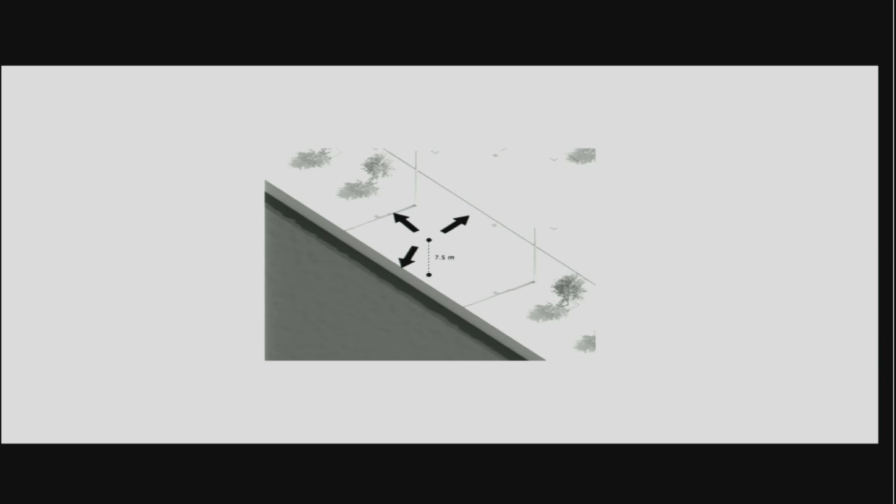We got invited to do a so-called viewing tower in Aarhus, the second city of Denmark. It was going to be 25 feet tall, which is hardly a tower. They wanted people to enjoy the view of the port, which is the biggest development area in the city right now. They wanted it ADA accessible, so we had to install an elevator—half the budget went to that elevator. We thought it was kind of an undramatic way to take an elevator 25 feet up, look out, and take the elevator back down.

So we thought maybe we could solve the ADA access in another way. To get 25 feet up, you need 500 feet of ramp. So we thought we could make this weird promenade in the sky, almost like a flower, where the journey is actually the destination. Since we're in the port, we thought we could make it out of raw steel, like a hybrid between a sculpture and shipbuilding. We got a shipbuilder to actually make our models—it was by far the coolest model we ever built, and the heaviest.

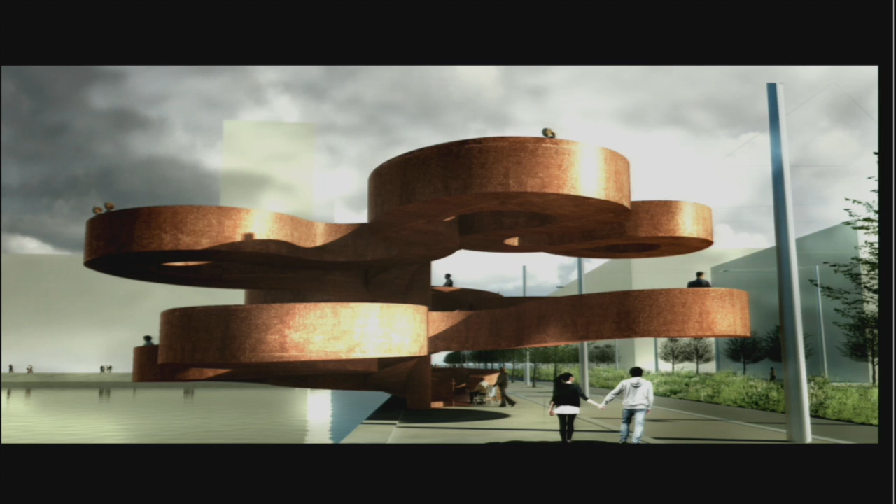Basically, it would sit on the edge of the pier, and you'd get this amazing meandering path. Actually, the handrail is also the load-bearing structure, so everything is a single monolithic steel structure, sort of tipping on the edge of the pier. We didn't win. But the idea was that by identifying this issue about ADA access and reallocating resources from a boring elevator to an exciting journey, that was somehow what created the project.

Another example is the project we have right now at the National Building Museum. We got asked to do a summer installation, and it was suggested to do a maze. It was going to be placed inside this amazing room inside the National Building Museum—it's the scale of an urban space, but under a roof. We thought, since there's so much height, the typical maze is purely two-dimensional, like this very flat experience.

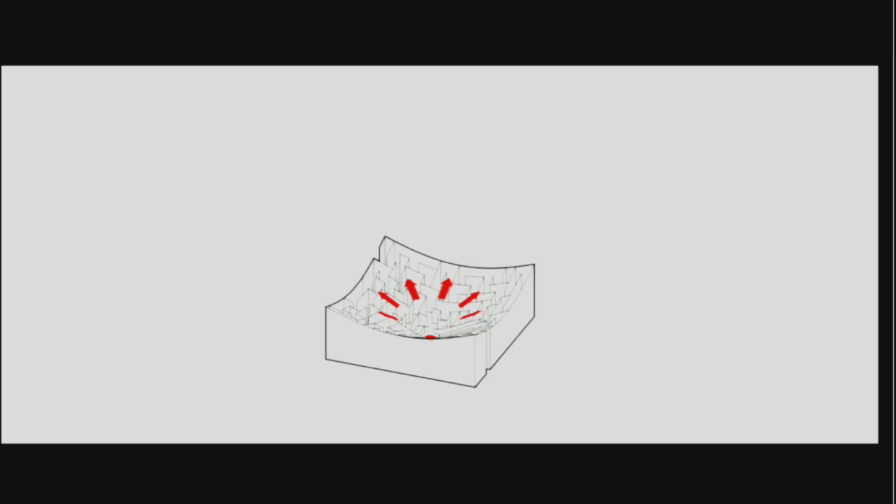We thought we should really explore the third dimension, and came up with this idea that if we extract a cone from this vertical volume, we create a situation where when you finally go through the entire maze and reach the center, you're actually rewarded with the knowledge that you know exactly how you got there. From the center, you can overview the entire maze.

As you go through it, in some cases it's incredibly narrow, like a vertical canyon, and as you journey through it, the spaces really transform. Finally, once you reach the center, you start getting a sense of everywhere you've gone through. It's designed so that when you reach the center, you've traveled through 95% of the maze, and there's almost a straight route taking you out. So again, this attempt to introduce the third dimension to an otherwise two-dimensional experience.

Maybe as a last example, this is my old high school. We're currently building this part—some classrooms, dressing rooms, and a football field. But the first phase was we were asked to do a sports hall. The only place to put it was either on the football field—but that's sort of the national sport of Europe, so to ruin the football field would be a pretty lame decision.

So we thought, let's put it in the courtyard. We would have to dig it down. Handball halls—handball is a Danish sport, invented by a Danish officer—but it's 15 feet of height you need on the perimeter, and then you need 30 feet in the middle.

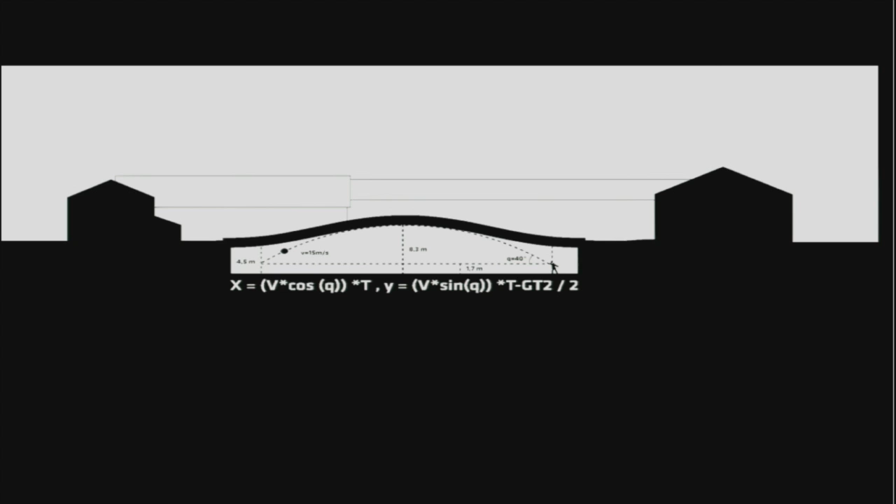Since we got the commission from my old math teacher, we thought we'd base the design on the mathematical formula for a ballistic arch. So it's essentially the geometry of a thrown handball that has shaped the curvature of the glulam beams. In the courtyard, it creates this sort of molehill.

Of course, we were afraid of occupying the courtyard, so we placed this furniture sort of inviting people to invade. There's a small auditorium over here—the entire edge is the height of a bench. Actually, this soft, friendly molehill has significantly increased the use of the courtyard.

So this is the construction site of phase 2. Also, we had the chance, the canteen is in the basement. So we created this new entrance that gave the high school a new front door. You enter into the canteen, then you continue down into the sports hall. One aspect: you have daylight washing the walls, so the perimeter is always sort of glowing.

And there are no finishes. Essentially, everything you see is hard-working material. So you have the glulam beams, that is the structure in the ceiling. You have the sports floor. The concrete of the retaining walls is the actual retaining walls. So there was no secondary application of finishes. And then the furniture incorporates all the lighting.

So you have this slightly magical atmosphere in the evening.

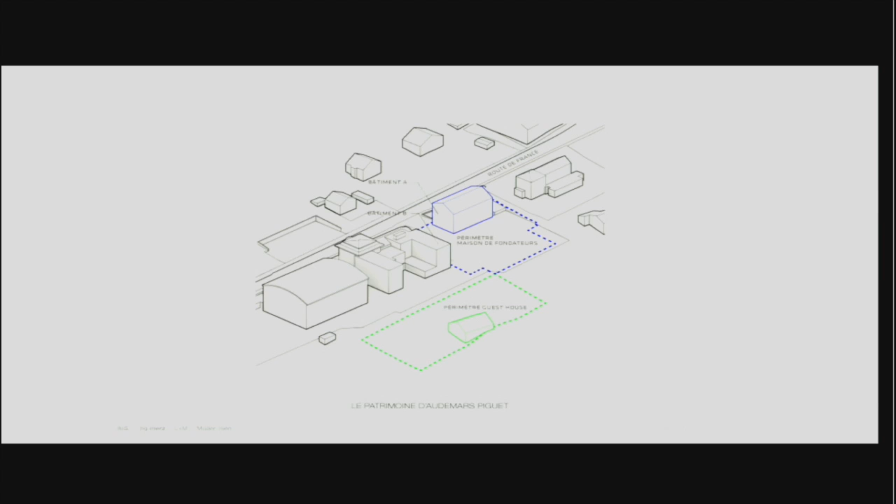And we were sort of invited to imagine how to introduce a museum of the history of watchmaking and of the company in this beautiful pastoral Swiss landscape. So we started, first our thinking was, you have the existing headquarters and the historical factory that used to make the watches up in this attic.

So we started trying to fit in by simply connecting the existing buildings. But somehow it always became this weird wall against the street. So we thought we should probably stay behind and focus on something lower that could coexist with the existing buildings. We tried breaking the museum down into its different parts as little pavilions, almost like a village behind the existing building.

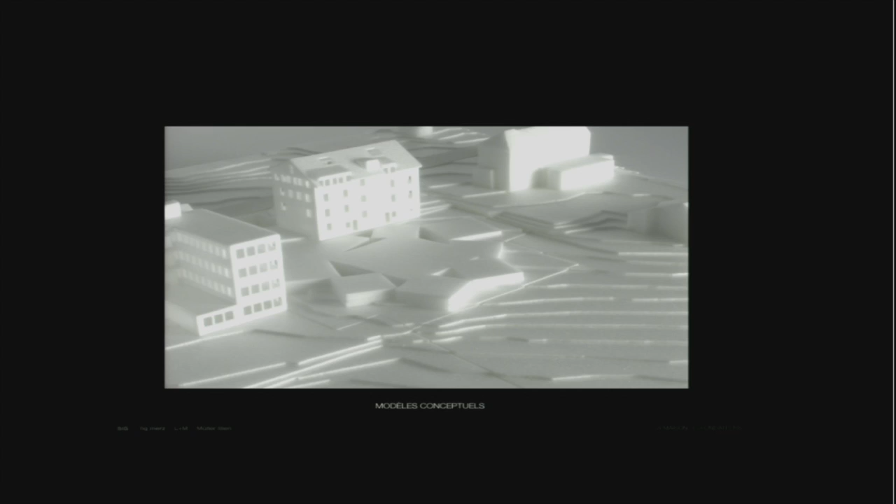We tried to organize it as a route. Basically, it's a linear exhibition where you go through the different exhibitions and then you end up visiting the attic. So we played with various ideas, then we tried to really stay low, to keep it sort of within the landscape. And we had to basically kiss a lot of frogs before we found something that was remotely promising.

So basically what we ended up with was this idea of taking the linear sequence of exhibitions, turning it into a single trajectory, and then to fit it into the site, we coil it up in this double spiral that spirals in and out. That basically becomes the exhibition.

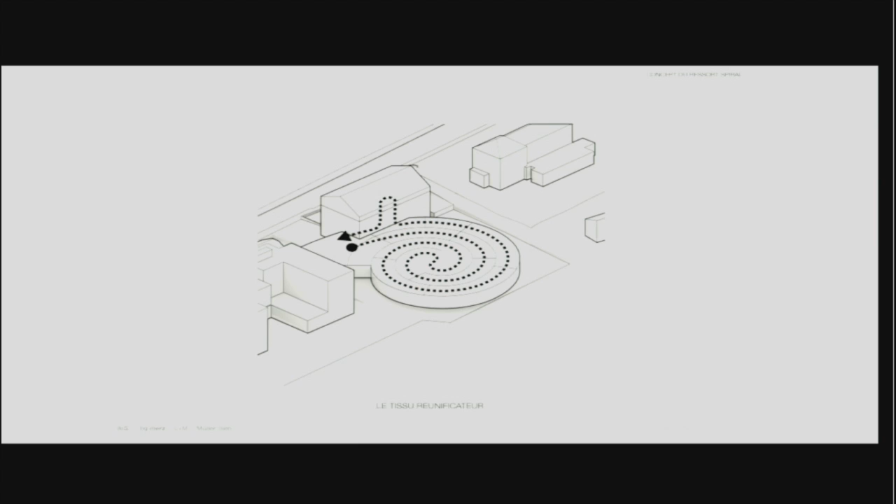So you go through into the central space, and then from here you move back out up to the attic, and then you're done. So basically we follow the topography of the landscape, and then by inclining the roof in different directions, we can bring daylight and views deep into the exhibition space. So even though it's a deep floor plate, you have a lot of relationships with the surrounding valley. From the roof, it's almost just like an incision in the landscape.

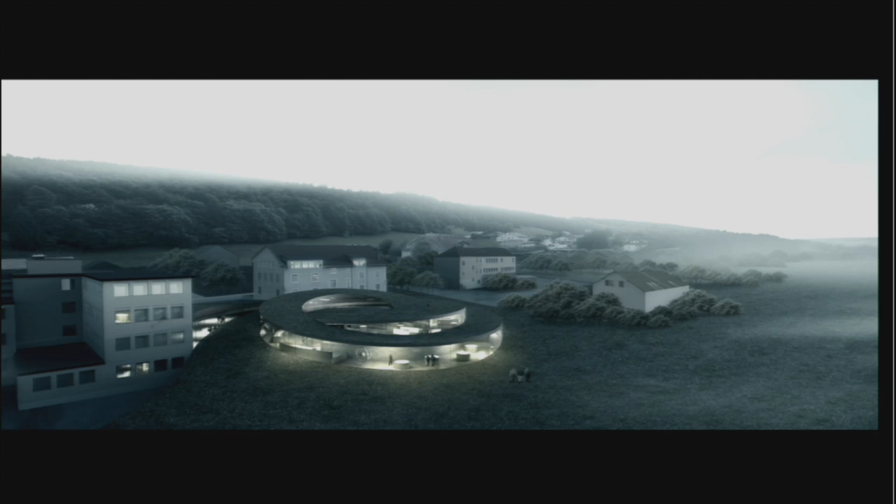So basically you enter into the existing headquarters, and even though it's like this linear sequence, the ceiling heights and the amount of daylight changes from very controlled to completely open. So it becomes this rather varied journey until you finally take the stair up to the historical attic.

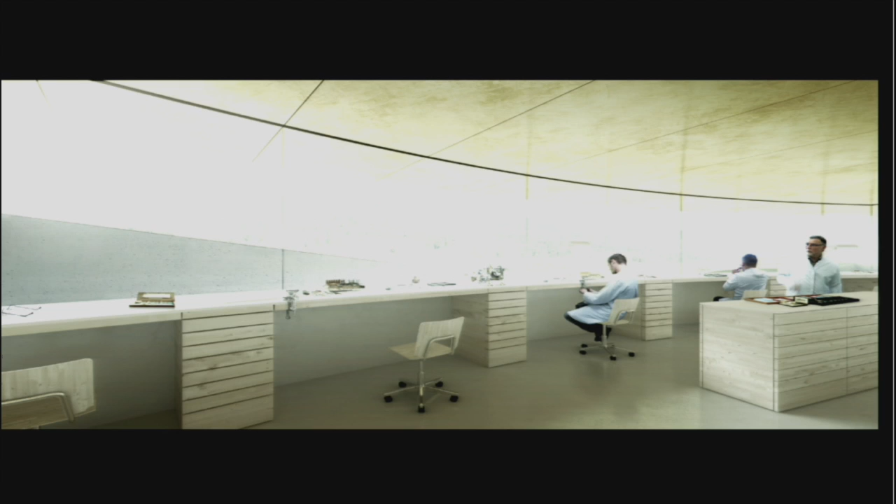The first thing, as you come through the existing building, you have a beautiful view over the valley. Then you get through some more controlled spaces, and you even pass along the workshops where the master watchmakers sit and repair the clockworks. Then as you move towards the center, you have a rather large central exhibition space.

And if you notice, throughout these cracks you get daylight and views of the surrounding valley. But to not interrupt, and in a way to almost quote the art of watchmaking, there are no columns. It's a very thin steel roof, clad in brass.

It's the glass itself that is actually carrying the roof, basically because glass is stronger than steel when it's in compression, but it cannot do any tension, and it also handles seismic events very badly, and the Jura Mountains is a seismic zone.

So when there's an earthquake, it trembles and breaks. But because everything is curved, the rigidity of the geometry of the curvature makes the glass strong enough to carry the roof, and it also means you have this completely blatant relationship with the surrounding landscape. Again, this idea of trying to squeeze as much performance as possible out of as little material as possible.

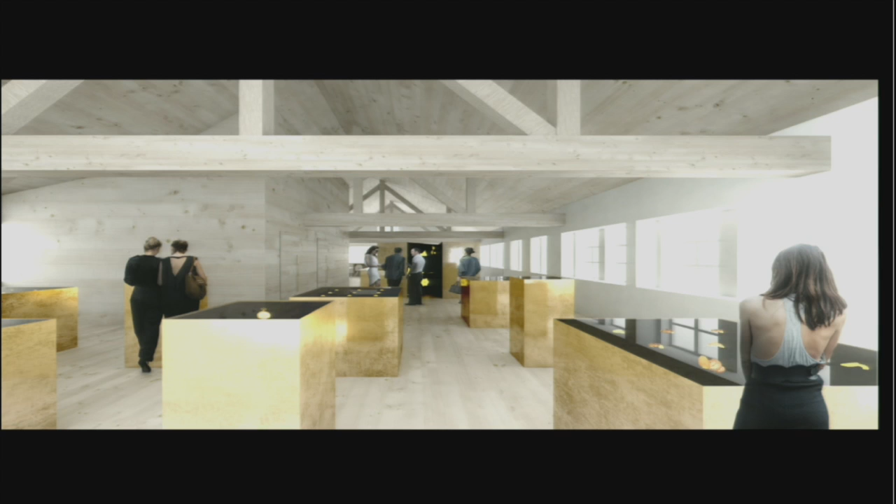And then for the existing building, we refurbished it. This is the stair that takes you to the attic, and here we stick to the local traditional materials.

So basically, we got the job. I won a nice watch. It's the favorite watch of JC, just to let you know.

Essentially, even though when you explain the project it feels almost natural, like it could only be like this, and once we arrive we feel it couldn't be any other way, in order to get here we had to go through an onslaught of different attempts. A lot of them were really rather bad, but even though individually they didn't succeed, they were important steps in identifying which way to go.

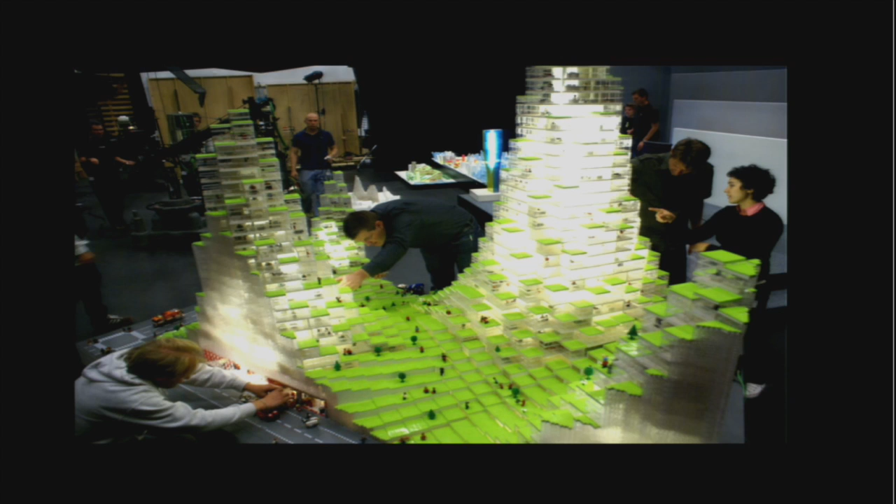So of course, model making and testing is a big part of the office. We love to make models, huge models, and sometimes we make models out of Lego. This was a project we called the Lego Towers, because it has this modularity that characterizes Lego. We actually got Lego to sponsor 250,000 Lego bricks, 2,000 Lego people, and 500 trees to make this huge model. When we were done building it, there was Lego left over the entire office.

This is just one of my colleagues walking around the office with a camera recently. There's basically Lego everywhere. Even the signage is made out of Lego.

This is one of my colleagues, Gabriel and Frederick, doing a workshop with the citizens of Copenhagen on how to influence your own environment using Lego. And Lego even copied one of our designs: this is the Copenhagen Harbor Bath, Lego style, in the flagship Lego store in Copenhagen.

So you can imagine when Lego approached us and wanted us to compete for making this new Lego House in the hometown of Lego. It's basically a house dedicated to all aspects of Lego culture, in a way looking at the world through the eyes of Lego.

We went completely bananas. I made a small speech for the team when we kicked it off, and I said, if BIG had been founded with the purpose of building a single building, it would have to be the Lego house. So we desperately wanted to get this job.

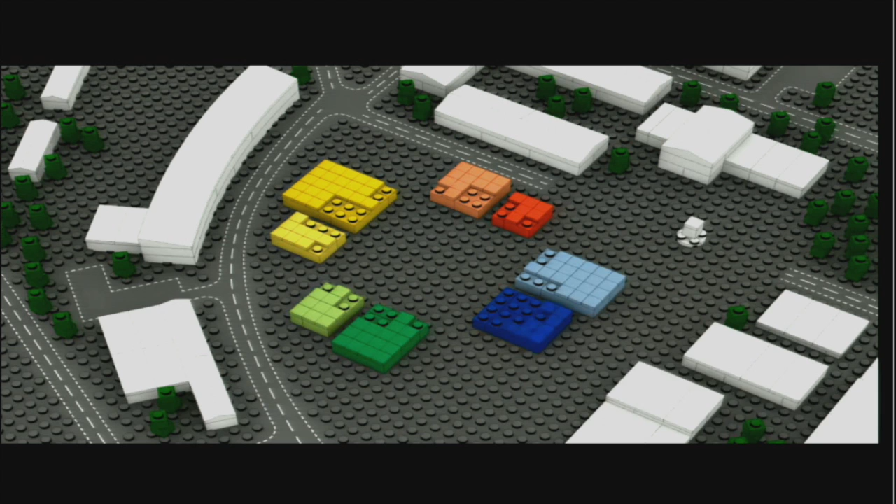So basically, it's in the middle of the town square of Billund, where the city hall used to be, and it was important that it shouldn't feel like a Lego invasion of the city. So we decided to create this village where we took all of the programs that would have a more urban character and organized them around a central square, what we call the Lego Square, that is completely public. Then it becomes like this covered cave, because above are the exhibitions, and finally the Keystone Gallery that sort of finishes it off, creating this accessible roofscape of interconnected playgrounds.

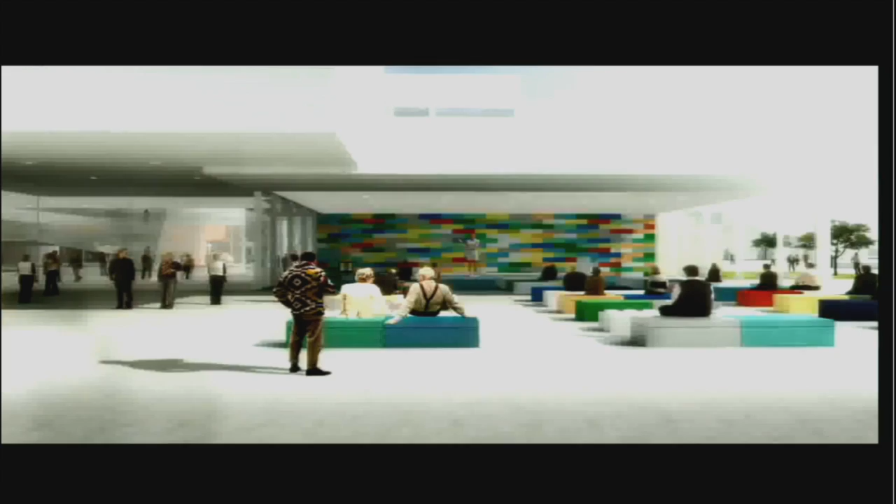So even if you are not going to visit the Lego house, if you're a citizen of Billund, this is actually sort of part of your urban environment. You can enter the covered square. There's an auditorium that can open up towards the outside.

And then basically at the heart of the square, this is imagined to be almost like a living room, an indoor urban space for the locals. Then you have this staircase surrounding some epic Lego installation. You have the Keystone Gallery in the middle, where it's almost like a classic art gallery, and then you have this series of overlapping spaces with all the exhibitions.

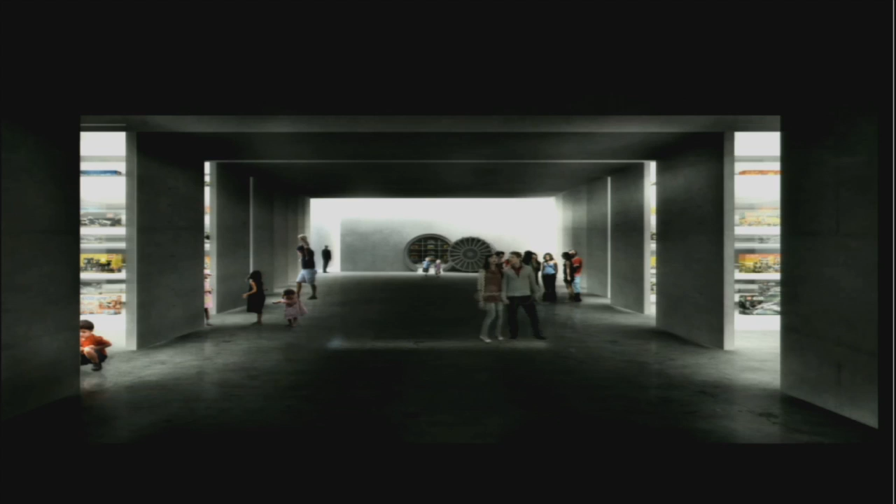And then finally, you can descend into the holiest of the holy in Lego, which is something called the vault. Every AFOL, which is adult fan of Lego, knows that the vault is where they keep the first of every single Lego box that has ever been produced. So it's a space that's designed to be able to withstand nuclear holocaust.

This is the Yellow Castle from 1978. It was the first Lego set that I got, which was the first year they introduced the minifigures, and it's apparently one of the gems of the Lego collector. We found we had to pay 2,000.

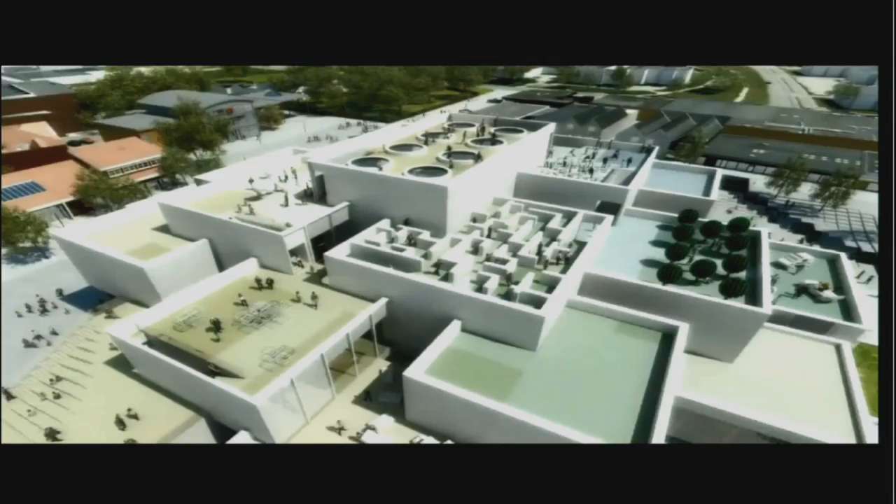Two of my colleagues, who are actually former GSD students, Kat Huang and Brian Yang, got married. So we made a fake wedding in the office for everybody who couldn't go to the wedding in Texas, and we gave them the Lego castle. I think it retails for around $2,000 on eBay, so if you have one, it's worth its weight in gold.

And finally, the entire roof is this interconnected series of playgrounds that are also publicly accessible for the people in Billund.

So yeah, we just broke ground. The family laid the foundation stones, concrete Lego bricks, that the entire museum rests on, and this is me together with all the richest people in Denmark.

And if you're interested, if you can't wait, you can actually buy the Lego house in a Lego architecture set, including a minifig that is built exactly like me.

So basically, I think one of the things that I really like about Lego is that it has this capacity for empowerment. It's not just offering children or anyone playing with Lego a pre-digested experience, but it actually empowers them to create their own world and inhabit it through play. And also, when you look at Minecraft, the success of Minecraft, which is essentially digital Lego, it's again that instead of giving this premeditated experience, it gives children the capacity to create their own environment and then inhabit it.

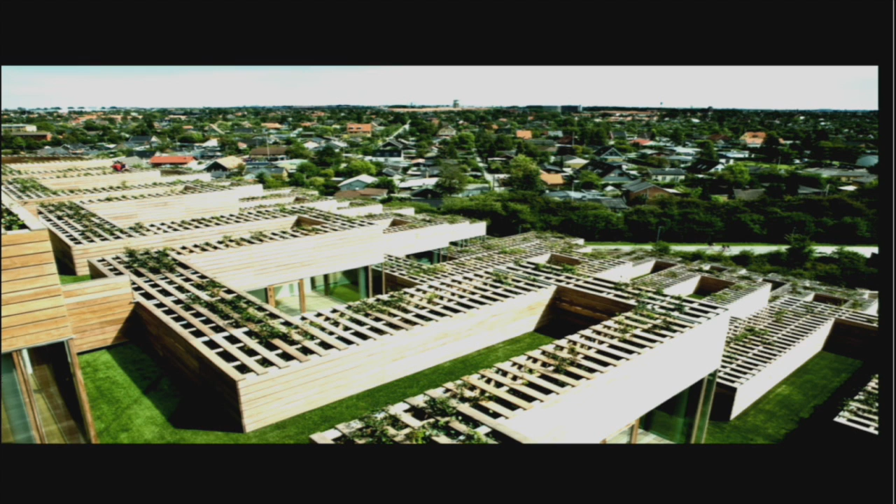Just some examples, like of course architecture is much slower than Lego, so even though we have quite a few projects on the way, a lot of the work that is built has been conceived almost 10 years ago. One example is we did this project in Copenhagen called The Mountain that transformed a traditional apartment building into a man-made mountain of houses with gardens. You have a suburban lifestyle, your kids can run out and play, but it's in the middle of the city. And this is made possible by putting it on a parking structure.

There's a Swiss elevator, a funicular elevator that gives you access to all the apartments. The parking is naturally ventilated and naturally illuminated. The holes that provide the natural ventilation also create a giant urban artwork for free.

Taking some of the same ideas one step further at the outskirts of Copenhagen, basically where cattle takes over, we created something called the 8 House that combines shops and offices on the ground with townhouses that are lifted by the offices up into the sunlight and the views, also creating this mountain path that expands the public realm.

Instead of being restricted to only meeting your neighbors on the ground, you can actually walk or bicycle all the way to the penthouse. So it's not just a facade design or a sculptural form, it's actually a three-dimensional urban condition where you really see social life occurring throughout the vertical dimension as well.

The amenities are all connected where the 8 crosses itself. There's this ricocheting stair that connects the ground to the roof terrace. And also, all of Copenhagen is as flat as what you can see here. So suddenly this has become a destination where people go to promenade to enjoy the view of their city.

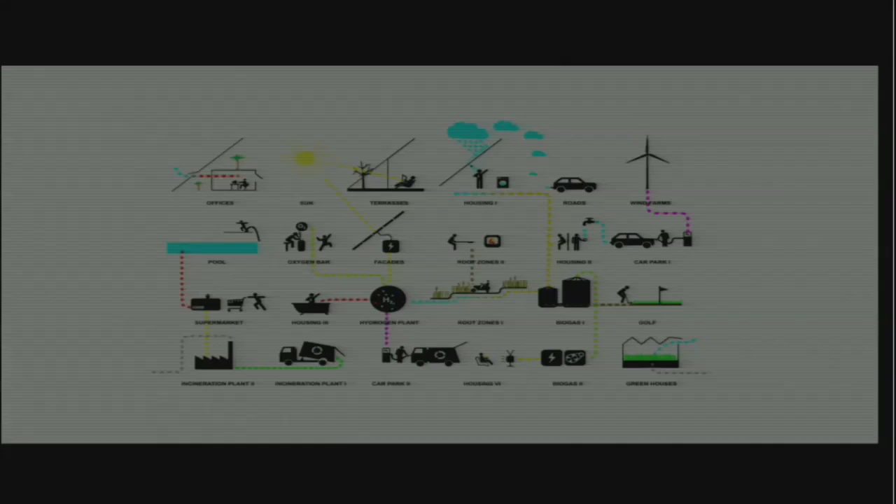I think these are some humble examples of where we try to make the city we live in a little bit more like we would want it to be, like with mountains and sort of Mediterranean mountain towns. Another aspect is this idea of not seeing the city just as an accumulation of architecture, but really seeing it as a man-made ecosystem.

We've been working a lot on trying to reimagine sustainability, because sustainability has of course become this big buzzword, but it's always been associated with this idea of needing to somehow, this sort of Protestant idea that it has to hurt to do good.

So when we got invited to do the Danish Pavilion at the Shanghai World Expo, where the subject was sustainable cities, we thought, what if we could turn it the other way around and focus on all the aspects where sustainability actually makes life more enjoyable.

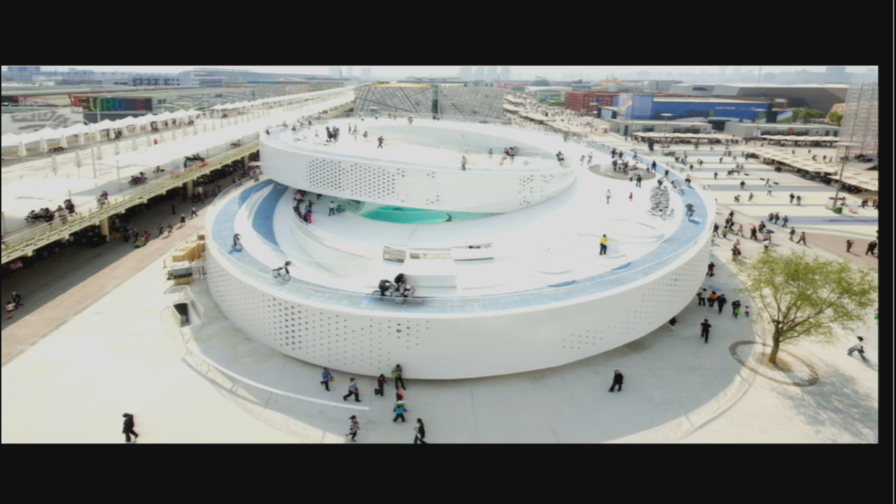So we took the aspects of Copenhagen that make it both sustainable and enjoyable, and condensed it into this loop streetscape, complete with the blue bicycle lanes of Copenhagen and the Copenhagen city bikes. For 20 years, we've had this system of free bicycles.

Allowing people to experience the joy of riding a bike through the city instead of being stuck in a traffic jam. You could also ride through the exhibition, making it the perfect museum for impatient people, because you could do everything in three minutes.

It had all of these sort of informal elements, like benches, and actually our first project from 2002 was the Copenhagen Harbor Bath, that extends public life into the water, because our port has become so clean you can swim in it.

You don't have to drive for hours to get to Cape Cod. You can actually jump in the port in the middle of the city. So we recreated this experience, allowing the Chinese to experience how clean, if not how cold, Danish harbor water is.

Finally, we thought we need to get the Chinese to come and experience this. I mean, it's fine if it's there, if they don't actually go there. So we started looking for common denominators between Denmark and China, and found that in the Chinese public school curriculum, they have three fairy tales by Hans Christian Andersen.

One of them being the story of the mermaid. So we proposed to move the mermaid to China. When the Danish People's Party, the Danish equivalent of the Tea Party, heard about it, they tried to pass a law specifically against moving the mermaid. So I had to go to Parliament and argue her case, and finally we got her.

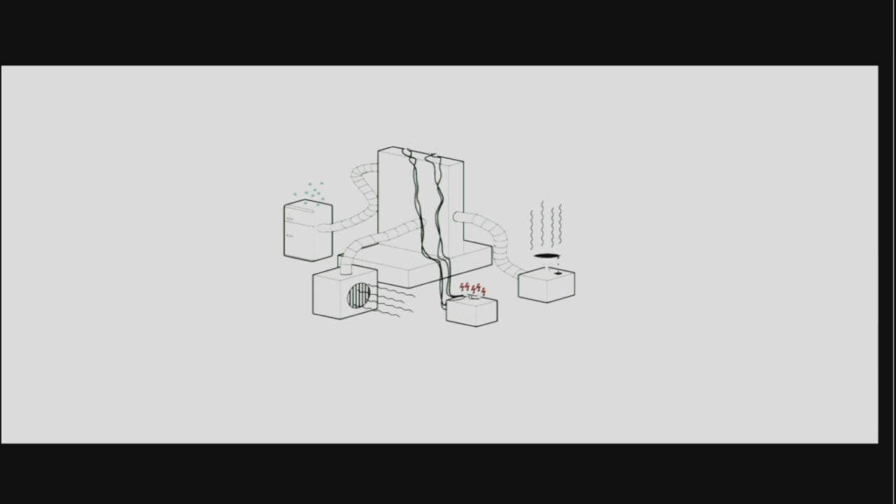But then it has a machine room full of gas-guzzling machinery that tube feeds it. And as a result, buildings started looking exactly the same, regardless of what culture or climate they were part of. And his suggestion was, if you look at pre-modern architecture, you had this vernacular architecture where the local population had found ways of using the local materials in response to the local climate, creating radically different vocabularies that are not aesthetic or academic, they're empirical.

So you know, like the dome shape of the igloo that combines a minimum surface with a maximum contained volume, like these sunken courtyards in the windy steppes of Mongolia. You have the white villages of Greece, where the white reflects the heat, and you have the flat roofs where you can go up and enjoy the evening breeze.

So what we're suggesting is not a return to nostalgia, but what you could call vernacular 2.0, where essentially we would harness all of the contemporary capacity to simulate and model and calculate the performance of a structure, like thermal exposure or wind movement. So instead of architecture without architects, what you could call engineering without engines, using contemporary engineering technology to engineer the dependence on mechanical compensation out of the building and put it back into the bones of the building.

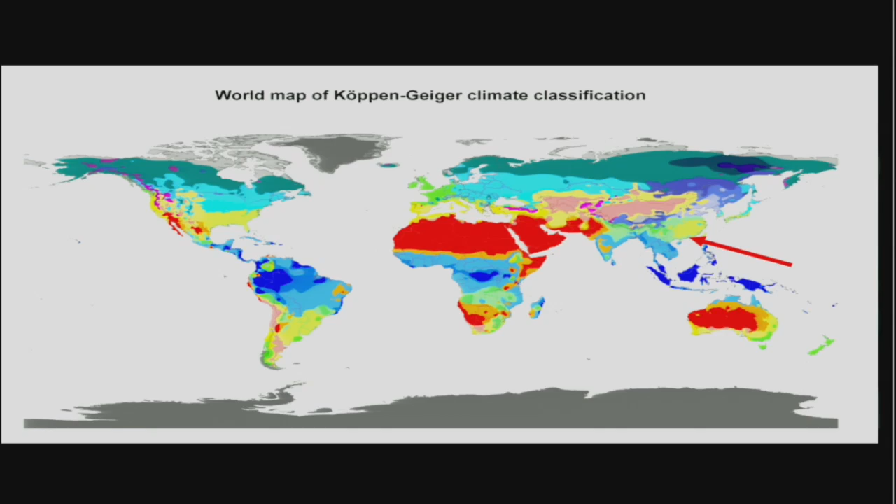One example, one of the first times we tried to approach this idea was for a competition for the main energy headquarters of Shenzhen, which is probably the most industrious region in the world. So they have a huge energy bill. And it's a 1 million square foot headquarter building.

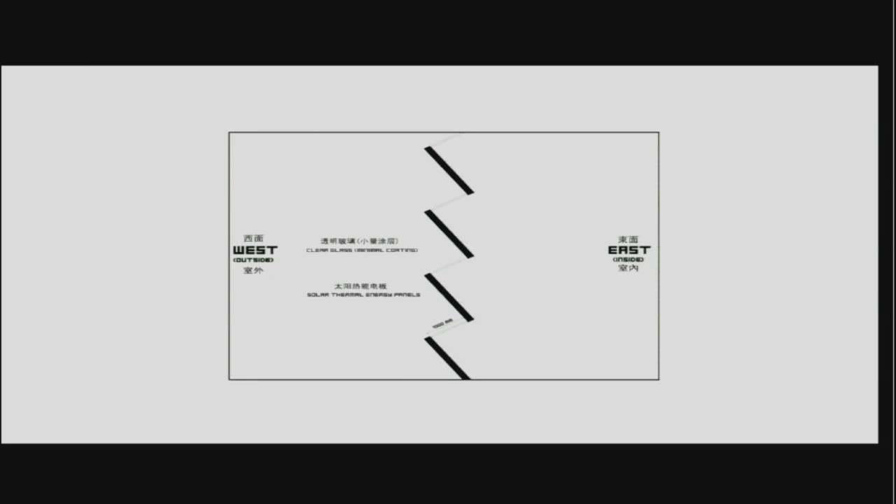Essentially, it's an office building in a subtropical climate. So you want to maximize daylight and views, but you also want to minimize thermal exposure and glare. So by making the facade like a pleated dress, opening up completely towards the north, closing completely towards the sun, when you look to the south, you see these bamboo walls washed in daylight, and when you turn around, it's an all-glass building with a good quality of light coming in.

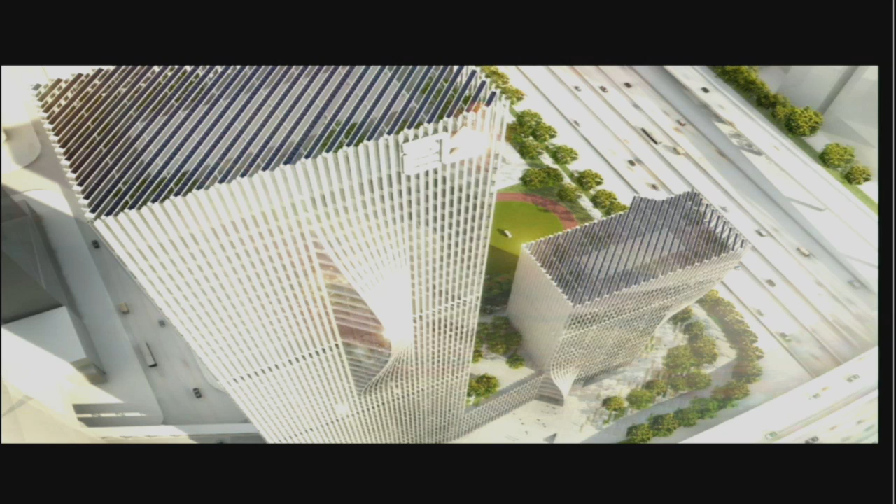Within this logic, you can create entrances, you can create executive meeting rooms. And essentially this basic idea, without any technology or moving parts, reduces the thermal exposure and the air conditioning by 30%.

We developed the principle with Arup. And of course, on the inside, it provides a special quality to the spaces. But essentially, what makes this building look different is also what makes it perform differently. It's currently under construction.

So then we tried to take this one step further. We got approached by a giant Korean corporation. They have these corporations that make all kinds of things, and we were invited to do a laboratory for photovoltaics. And we thought, again, because it has to do with the sun, maybe we could base it on somehow dealing with the thermal exposure.

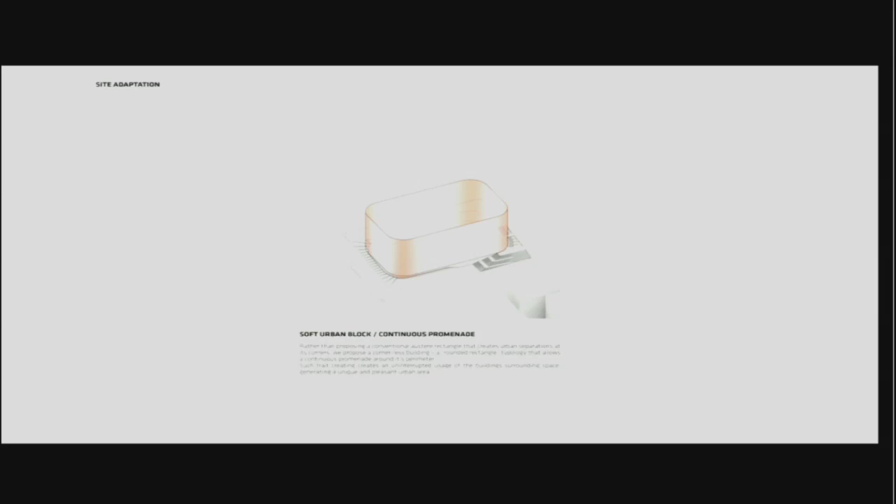It was just this simple block within an existing master plan with rounded corners. And we thought, when you look at traditional louvers, when they're facing south, they would like to be horizontal to block the relatively vertical incoming sun. But to the east and the west, the ideal angle is more vertical, slightly angled to the north, because the sun comes in at a very low angle. But once you apply it to a round shape, the ideal orientation of a permanent louver actually becomes this gradient from horizontal to vertical.

So essentially, as the sun travels over the sky, the ideal angle changes. So we applied this logic to the building, analyzing the optimum orientation, and it creates this almost ornamental pattern where we didn't make a single design decision. It's literally the optimum angle facing the sun, but it actually acquires its own aesthetic.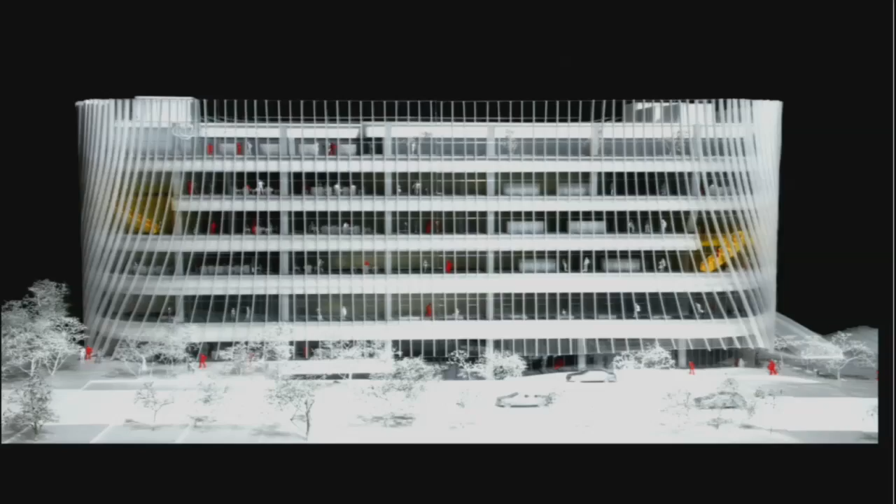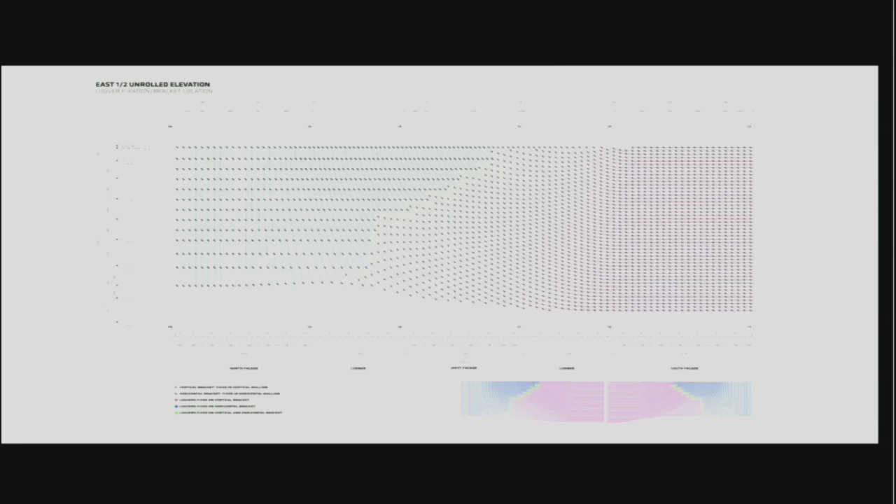Of course you need BIM modeling, building information modeling, where even though it looks like an organic and maybe expensive facade, you can start breaking it down into its constituent parts, how to mount it from the horizontal to the vertical fixed points, the different lengths. Even though you have a lot of different parts, you can see that these and these and these are actually all the same. So you can get a lot of rationality into an otherwise highly tailored form, and get all these unique moments that are actually very controllable.

Also, when they turn around the corners, some of them actually twist lightly. When they go north, they become shallower because you don't need as much louver. So we took it really far, and everybody was happy.

But then you might remember that four years ago there was a huge dip in the stock market prices of photovoltaics. So one day the client called us up and said that it wasn't going to be photovoltaics anymore. They were going to make robot-guided missiles instead. And we have a principle: we don't contribute to arms manufacturing. So the project died after about a year and a half.

But then we got invited to look at making the Museum of the Human Body in Montpellier, which is the cradle of modern medicine in Europe. They have the first sort of medical herbal garden. And it was going to be on the intersection between a park and the city. It had a quite well-defined space program.

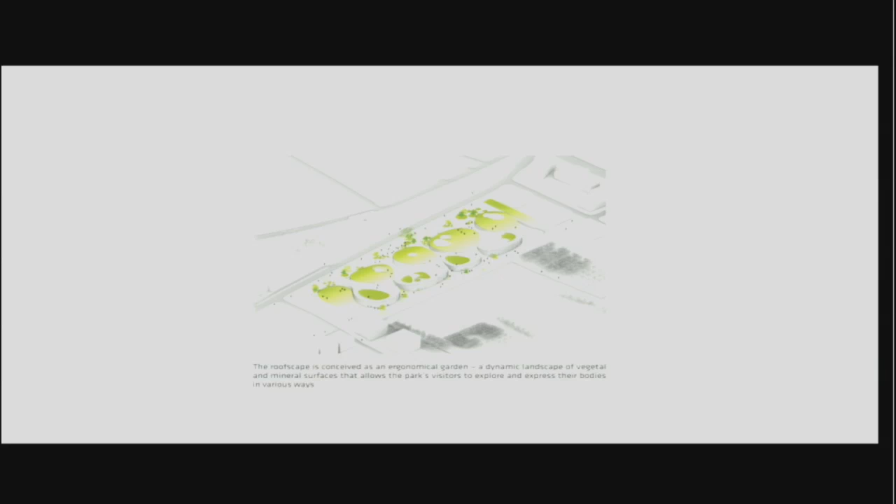So our basic idea was to break this rather large footprint into a series of pavilions that interconnect, almost like bringing all of the different exhibition spaces connected by a spine. But as a result, it brings the park into the city, and it brings the city into the park. So you have these little plazas hovering over the landscape, and these little islands of green overlooking the square.

And also, even though it's a rather big building, from the park itself it looks like individual pavilions where you can sneak between the buildings and find yourself on these accessible roofs.

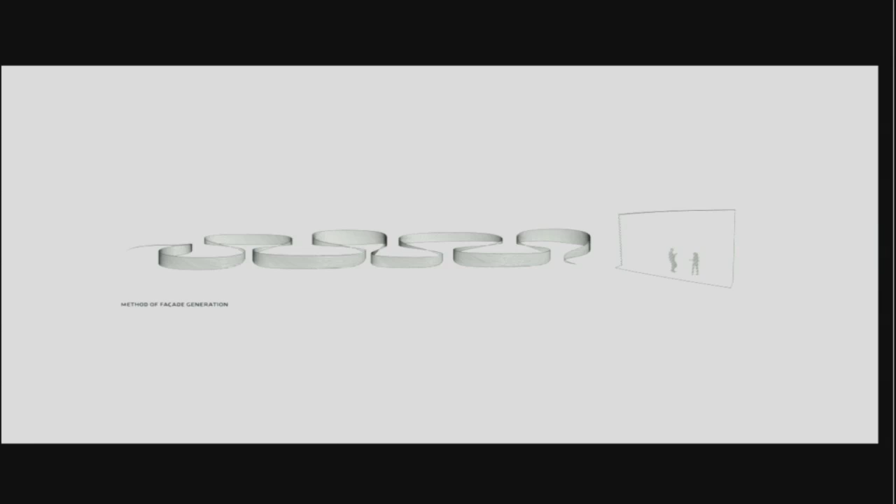But Montpellier is also the hottest city in France. And since every single facade we had was curvilinear, we could basically take the principles we had developed, because we have a parametric model. So even though it's a slightly different situation, a slightly different climate, the principles are actually the same, and they generate this almost thumbprint-like pattern on the facades.

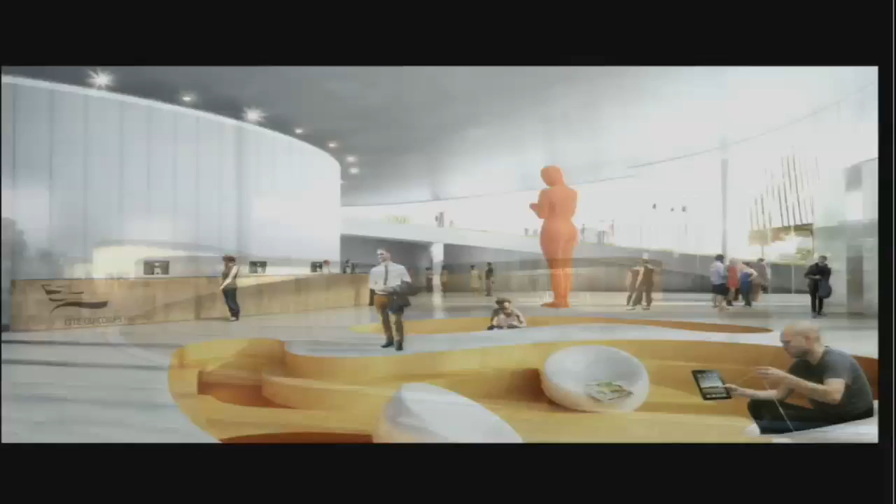So it looks like we might be able to get it out of our system after all. The climate doesn't only have to be a problem that you have to defend yourself against. I think an important aspect of architecture is also to get the most out of what's there.

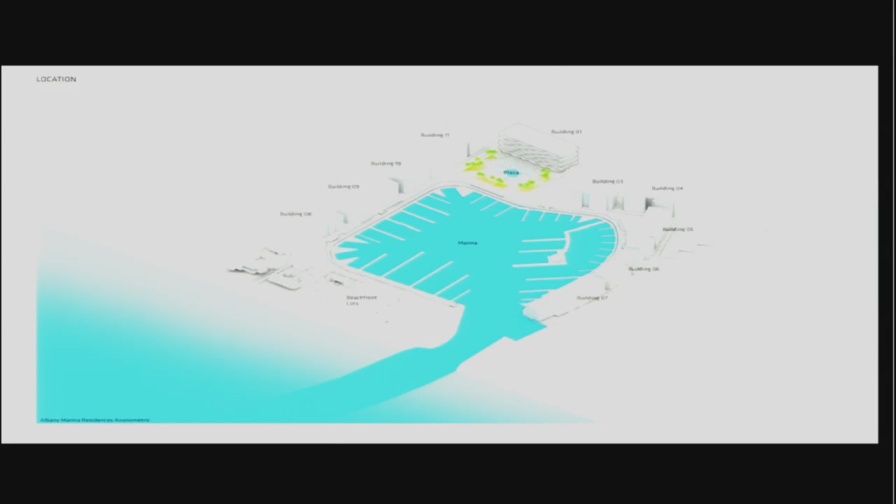One example is we're doing this condo building in the Bahamas for the privileged. It's next to this marina where you can park your 300-foot yacht. The last time I was there, Steven Spielberg was navigating his 300-foot yacht around, like it's a small ferry, or actually a large ferry.

And the idea was that they wanted to have these really nice condos where, because the climate is so nice, each condo has a balcony that's 15 feet deep with a nice pool. Everybody wants a pool on their balcony, obviously.

So we thought, instead of stepping up on this bathtub, of course if you have a pool on your balcony, you would want to go down into it. So we came up with this idea that basically allows the balcony to sink down to accommodate the pool, always placed right above the partition wall of the two homes below, so that the entire 15-foot high concrete wall becomes the load-bearing beam that can actually carry the weight of the pool. And suddenly, having developed this very simple system, the facade of the building had sort of designed itself.

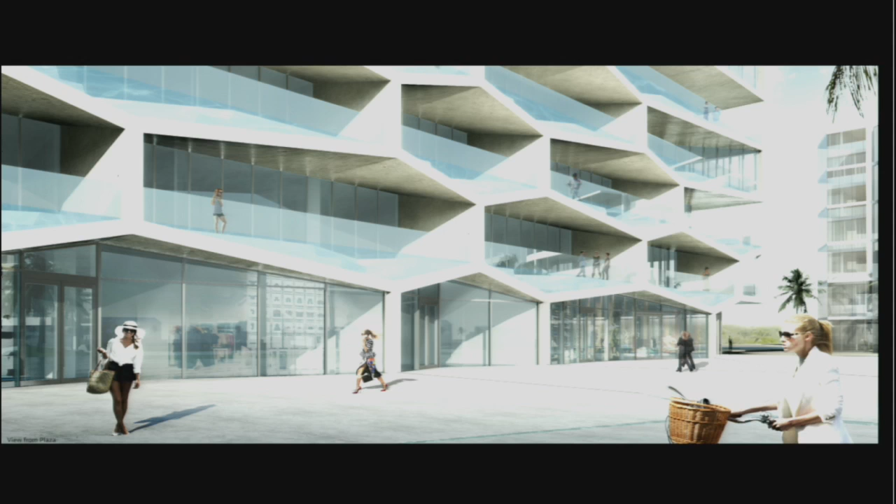You also get this porch-like condition, almost like having your own villa with sloping roofs on the balcony. And the pool really becomes part of the facade.

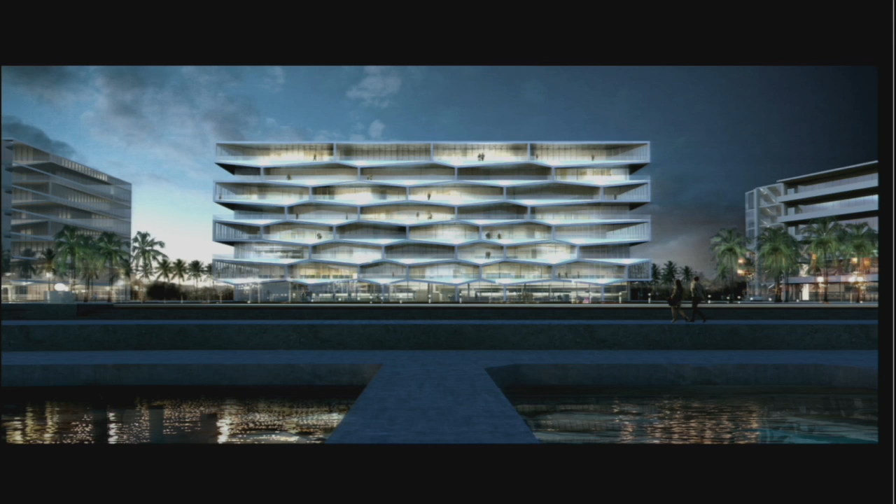The handrail is a single sheet of acrylic glass without any verticals—it's aquarium glass. You can get it up to 75 feet, so it's every architect's dream to have all glass with no mullions. At night, the whole architectural expression of the building really expresses what's unique about living there: your own pool and amazing outdoor space.

Exclusivity is often associated with architecture, but I think one of the principles we try to adhere to is also this notion of inclusion. Waterfronts are one of these things where you see industry moving away and new things moving in—how do you retain the public aspect?

Two quick examples. We've done a project in Bordeaux that brings an art museum, a theater, and a library together into a new institution. The challenge was how to bring these things together while retaining their autonomy, but also having a shared aspect.

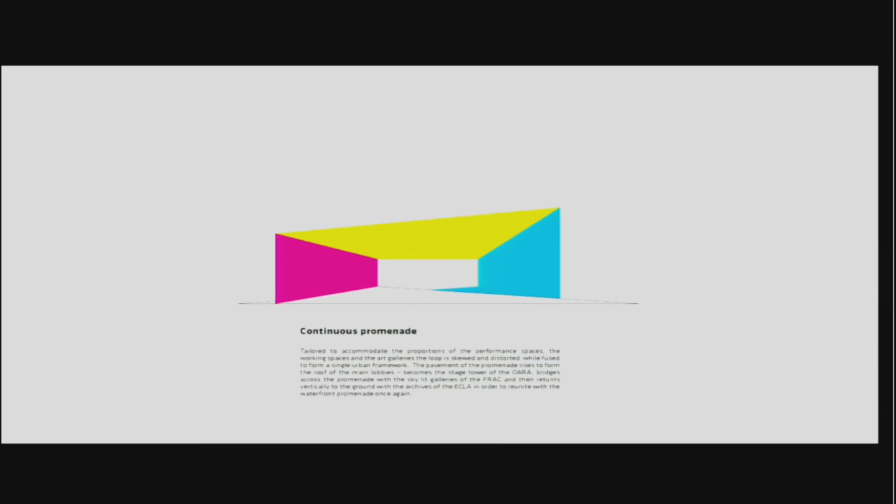It's on the waterfront, so we decided to create this almost like an Arc de Triomphe on the waterfront. It creates a loop on the promenade, allowing the promenade to pass through the building. So on one hand it's a continuation of the promenade, and it's also like a window between the city and the river.

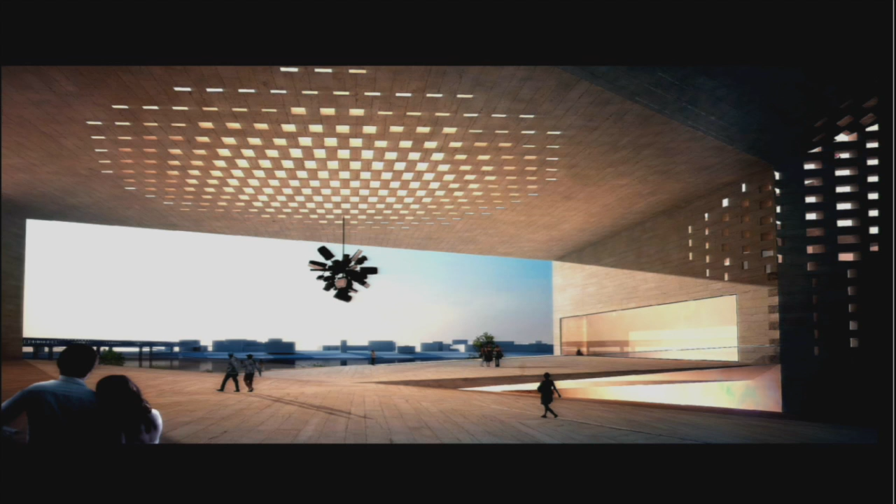You enter into the main lobby through this generous stair, but also all the different institutions—the library, the theater, and the art galleries—create this shared room where they all open up and can have outdoor activities undercover.

As you pass through, you also get glimpses into the lobby. You have the exhibition spaces above, and an outdoor sculpture garden with a view of the UNESCO city of Bordeaux.

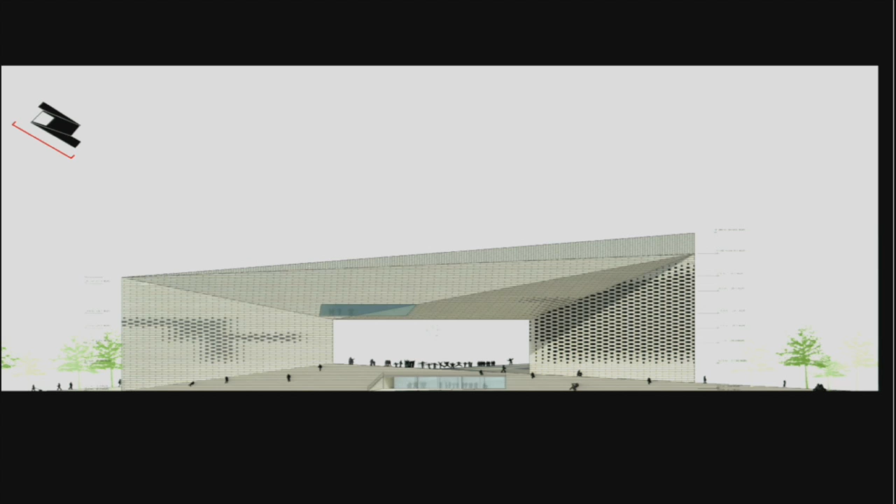We wanted it made out of the local stone in Bordeaux. So the spaces that need daylight, we tried to integrate into the fabric of the stones, so that even up close they're actually nice windows, but from a distance it almost becomes like a pattern on the facade.

But essentially, the whole city is invited to participate in this urban room, and it becomes the shared space for all of the different institutions.

Another example is that we're doing a headquarters for one of the biggest Danish pension funds in the middle of the port of Copenhagen. It's right at the tip of this island.

Even though Copenhagen is very homogeneous, suddenly in the port you have this great variety of power plants, old cranes and warehouses, silos that have been converted into new structures. There are some residences designed by MVRDV wrapping around two silos. So there was a certain freedom in exploring different typologies.

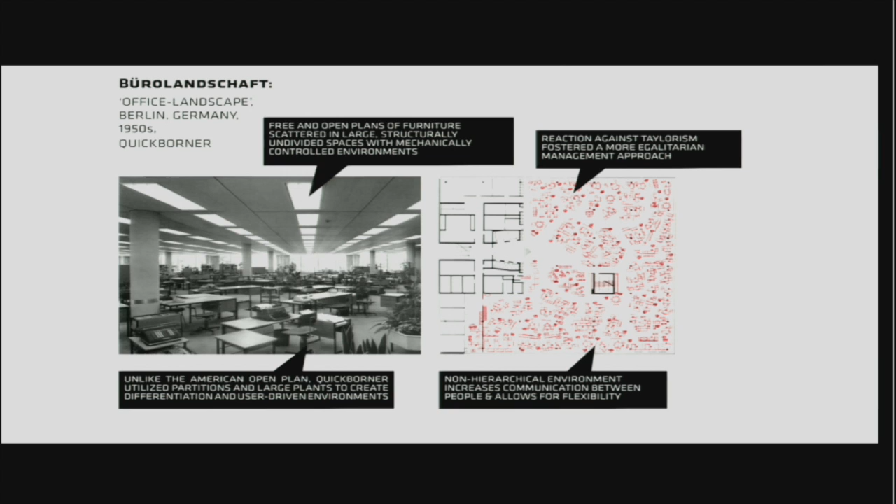When you look at the workspace, one of the main inventions is the office landscape of the 50s, this open plan. There's the structuralist office that combines different elements into an organic structure. And you have the GSD, this attempt to navigate the horizontal tyranny of floor plates.

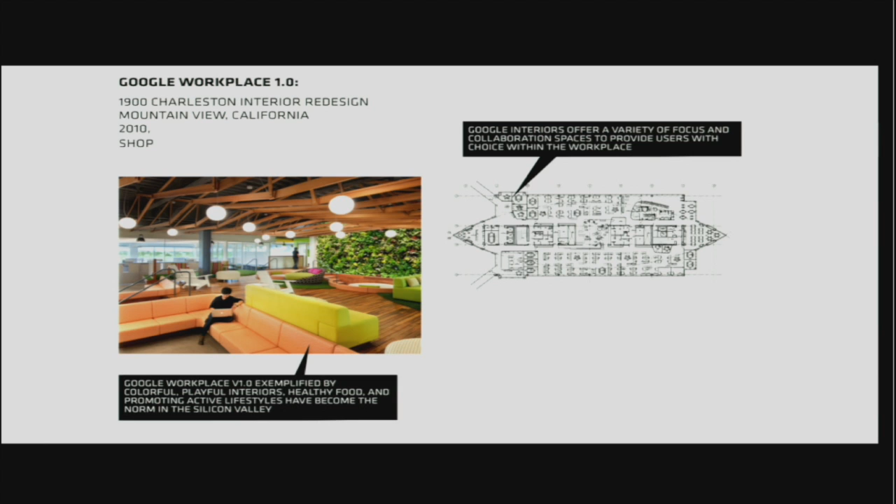But then I think in the mid-to-late 80s, office buildings suddenly got incredibly formulaic again, with these slabs, especially in Europe. More recently, it's mostly been in the interior design that this playful interior style of Google has become the standard of the IT business. And recently with both Apple and Facebook, there's this idea of introducing lush outdoor activities or amenities, so that when you're doing all-nighters you can still get some fresh air without losing your Wi-Fi connection.

This emphasis on being present has to do with the interaction and exchange of ideas. When you look at what happens in a typical office, like Danish statistics show, on a typical day about 20 people don't even show up, 6 people are away but will come back later, and only about half the people are actually at their workspace.

You have a lot of different ideal depths, from very slim slabs to big office floor plates. In Denmark, there are very strict regulations about daylight, so if you want deeper floor plates, you also need taller ceiling heights. Our New York office is a more classic office floor plate, and the office landscape in Copenhagen is the other extreme.

Finally, because it is the port, it's a pension fund, so they want to be seen as generous towards the city, because it's the people's money they're investing. They also want to create a destination to make this new development area a success.

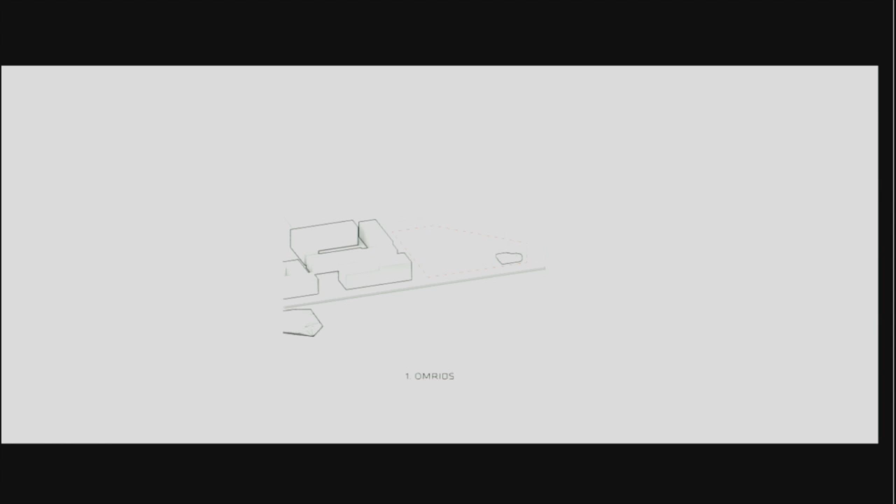Because it's at the peak of the pier, you can actually build much taller, like 180 feet, than a typical Copenhagen building. So we got this idea of extending the waterfront promenade into this ziggurat that creates a series of different floor plates with radically different dimensions, and also creates a park that extends all the way to the roof.

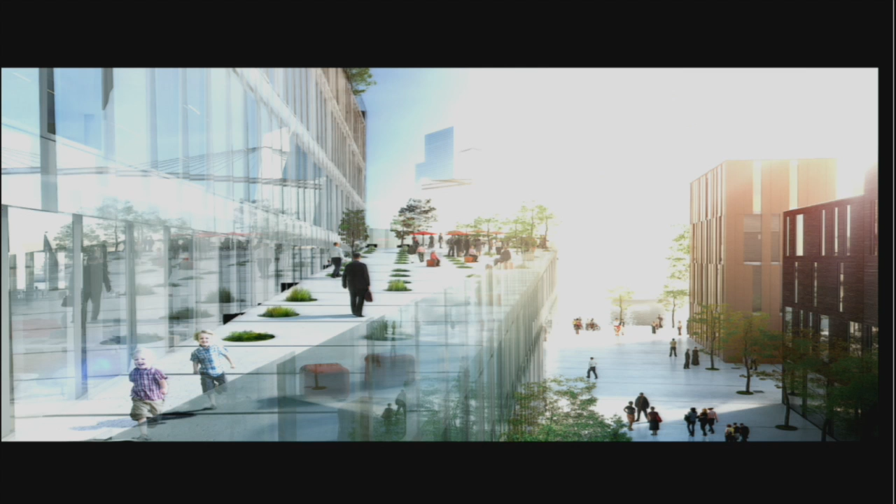Every single floor actually has access to its own terrace. The restaurant opens up to a huge terrace overlooking the water. No matter where you are, you have direct access from your floor out to a terrace. People just passing by can reach the tallest located playground in all of Copenhagen.

The intersection of this sloping ramp and the horizontal floor plates creates double height spaces where, instead of a big representative atrium in the middle, every single floor has shortcuts with direct connection to the floor below and above. This possibility of spotting one of your colleagues, even on another floor, allows for meandering through an otherwise very straightforward working space.

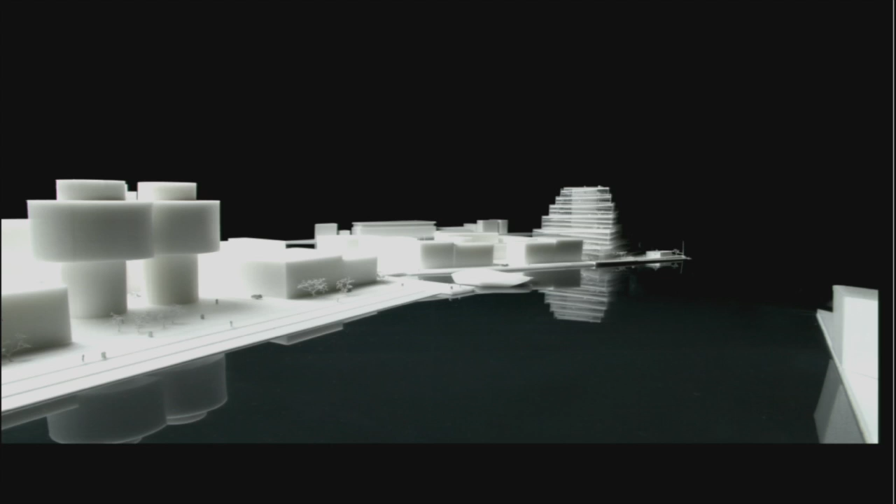And the result becomes this ziggurat-like silhouette. The floor heights also vary from the really tall to the more intimate.

In Copenhagen, we have these historical buildings. This is our Savior Church that has an external spiral stair, so you can actually walk all the way to the spire.

You have the round tower, which was built for King Christian IV, because he liked it—it was a star observatory. He liked looking at stars, but he hated stairs, so he made a ramp where you can ride your horse all the way to the top. It was good to be the king back in the days.

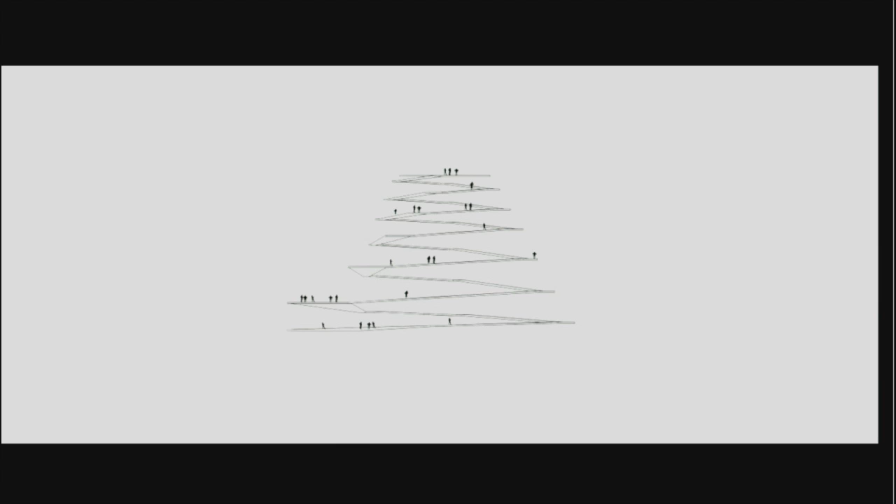In a way, this idea is almost like the round tower for the people. You can say it's almost combining the exotic silhouettes of the historical spires with the rationality of the contemporary office towers into this new hybrid.

We also looked at the public domain, because every single surface is a public amenity. It's interesting because it's on the waterfront, so there's a lot of wind, but the terraces actually turn out to create nice sheltered zones adjacent to the building. So even if you're on the higher floors, you generally have good conditions on the outside.

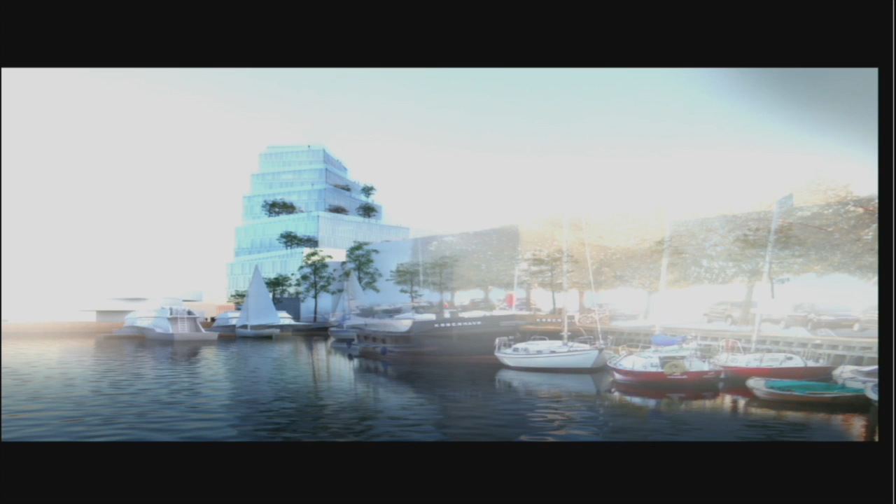Finally, daylight, as I mentioned, is incredibly important. We had to verify that it was possible to do these big office plates. It wouldn't be a problem in America, but in Denmark you really need to verify a certain percentage of daylight. Because one driver of daylight is view of the sky plane, and we have water on 3 sides, there are no neighbors blocking the view of the sky. Reflections from the ground also give additional daylight. So the combination of the terraces and being surrounded by open space and water on all sides meant we have incredibly good light conditions on every single floor plate, no matter the depth.

As you can see, this relationship with the public is a major part of our work. But in one case, we tried to take public participation into a complete extreme.

You might remember that Denmark had a cartoon crisis a decade ago. A provincial newspaper hired 12 cartoonists on a misconceived crusade for liberty of speech to make fun of the Prophet Muhammad, pissing off 1 billion Muslims worldwide, including all these boys. This is where our office used to be in Copenhagen.

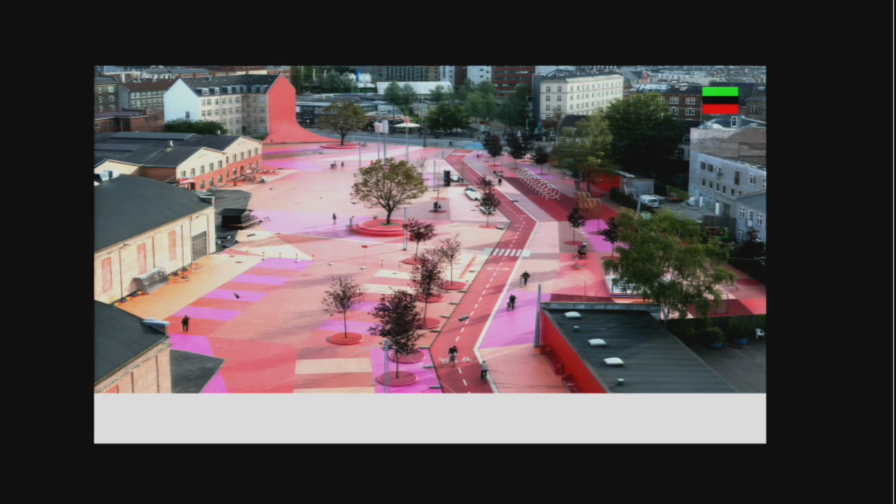We were located in the most ethnically diverse neighborhood in all of Denmark, 60 different nationalities, and we were invited around that time to look at a new urban space. It was a former rail yard - this is Iwan Baan taking photos out of a helicopter. Essentially we created what we call the Red Square, where everything is shades of red, the Black Market, where everything is black as a main element, and the Green Park. We thought, instead of dealing with the issue of integration as a problem or a challenge, what if we would see it as a potential?

So we reached out to the local population and asked them to nominate elements from their other home country. We used the local newspapers, Facebook. We ran local ads. We had a lot of public meetings where people could nominate elements from their other home country.

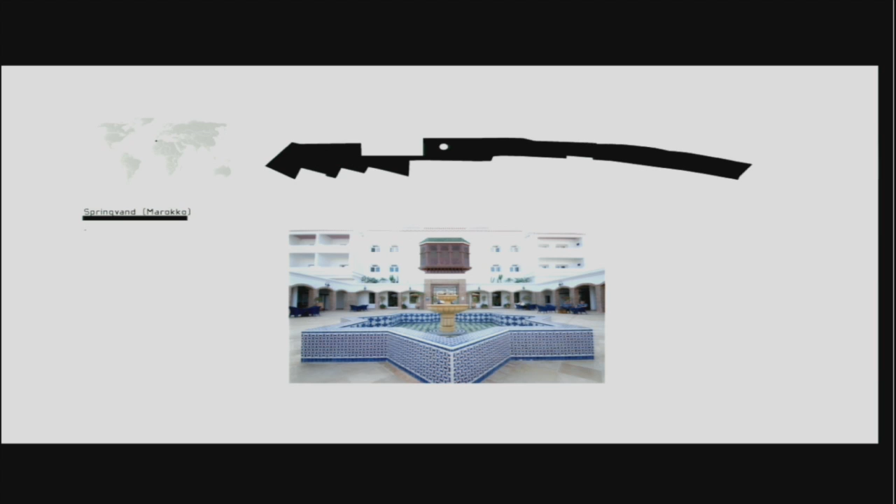And the idea is that we don't eat Chinese food to be nice to the Chinese - it's because we crave Beijing duck. And we didn't put a Moroccan fountain in the middle of Copenhagen to be nice to the Moroccans, but because they have an incredible tradition for architectural water features.

So there's a Jamaican sound system where with Wi-Fi you can plug in your iPhone and make outdoor concerts. The neighbors hate it, but it's actually designed so you can't play louder than the law allows, and it shuts off at 9 p.m. Thai boxing arena from Thailand, Iraqi swings, trash cans from Great Britain, bollards from Ghana, bicycle racks from Finland, a sign from the Red Square.

There's a bus stop from Kazakhstan, way more architecturally advanced than a typical Danish bus stop. We found a slide in Chernobyl - we had to make a copy because the original was radioactive.

Manhole covers from different cities. Palm trees from China that actually grow in a Danish climate. The octopus from Japan also highlights this integration, having these elements bring different children together.

When you look at the benches, it's like a cultural study. From Mexico, an S-curved love seat where you're looking the person you're sitting next to in the eyes. From Belgium, a bench where everybody looks away from each other. So it becomes almost like a global best practice of different kinds of street furniture.

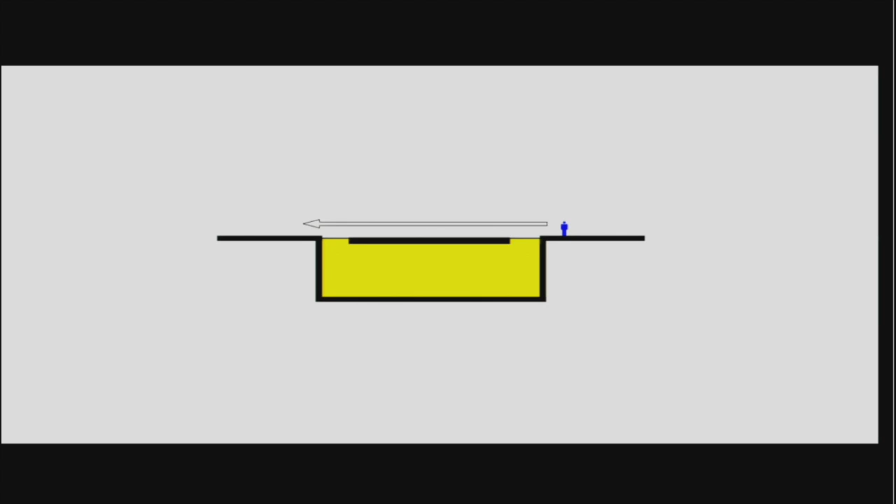It also resolved this dilemma that UNESCO said we weren't allowed to stick as much as a foot out of the ground, but the museum wanted a masterpiece to attract visitors. So by making it a void, we could combine the need for invisibility with the desire for exposure. This is the moment where suddenly the dock that used to be a hole became an object in an even bigger hole.

We could manufacture the bridges on a Chinese shipyard, just the way you make ships. These big steel structures are lifted into the dock and it clicked in place.

To prevent cars from driving into the dock, we made these mooring elements that are actually Morse code. So if some of you can read Morse code, there's a secret message.

You descend on this ADA accessible ramp because we couldn't even make an elevator tower, so we had to resolve access old school style. You gradually slope down, enter the exhibition, and then you have this series of spaces that change dimensions, from the very intimate to the vertical and narrow, to the huge cargo bay.

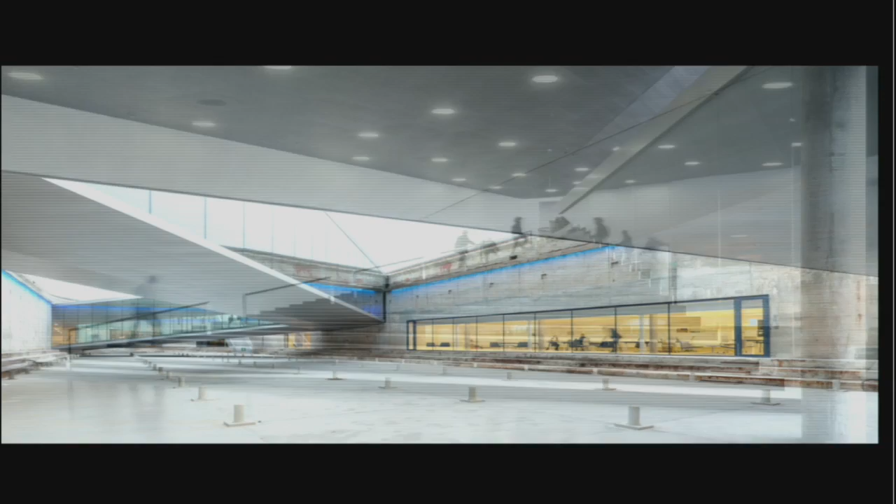We could even bring daylight into the workstations. Essentially the idea is that everything you see is real elements, like these earth anchors, because as soon as we emptied the dock and put a museum around it, it becomes almost like a ship. It really wants to pop up from the uplift of the water and sail away. So these anchors actually go 120 feet into the ground.

Paradoxically, it's actually the tallest building we've built in Denmark, but from the horizon and down. This is the access bridge where the handrail of the arrival is used as additional structural depth. So you can see we have a lot of depth, but the lower floor, because it comes so close to the ground, we wanted to make it as slim as possible. You can see it's like a quarter of the height.

And that's made possible because the floor you're walking on is actually hanging from the ceiling above you. So this is not a theatrical element, it's an anchor chain—a hard-working part of the structure that shortens the span of the lowest beam and hangs it from the ceiling. And you have the real dock outside where they used to build ships, so you get this contrast between the lightness and the heaviness of the old.

The auditorium for the grown-ups passes under the stage and creates an auditorium for the children. And the restaurant is where the dock actually continues through the glass and into the museum, and you get this view out across the full length of the dock.

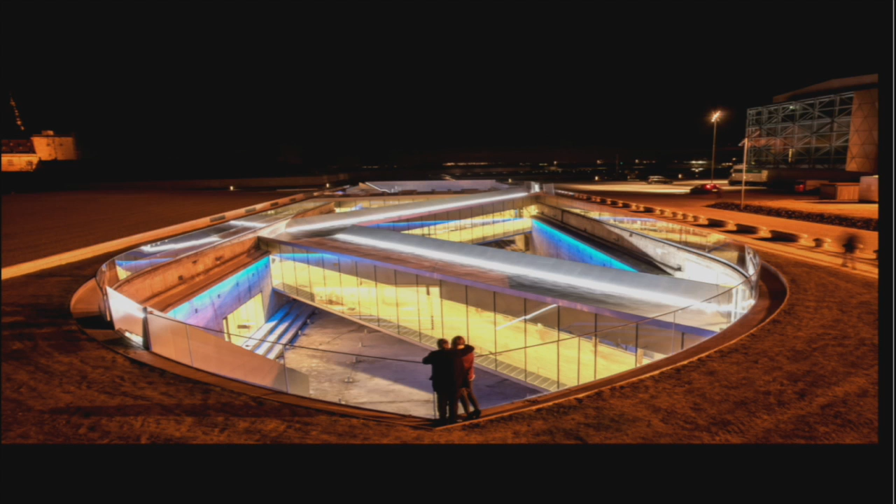This is me and my girlfriend performing an inverse Titanic moment.

Then another project, sometimes heritage is positive, but we're actually doing a project on the west coast of Denmark where heritage is more negative.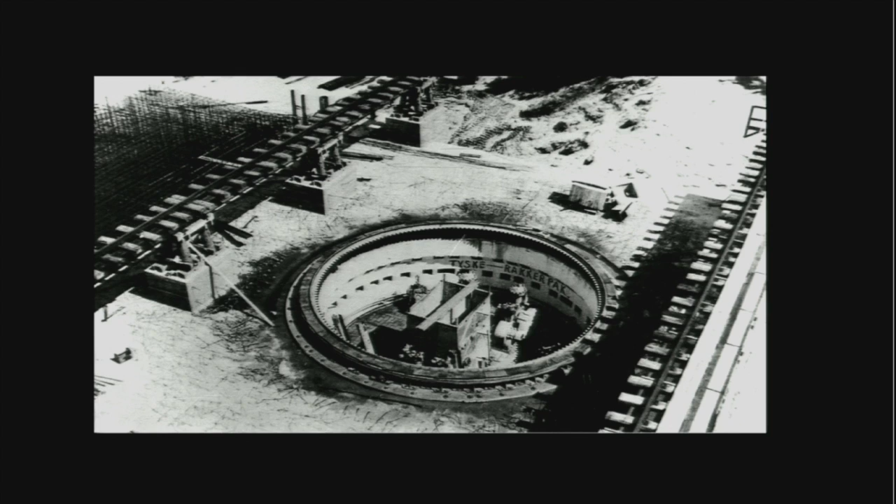Denmark was obviously occupied during the Second World War, and the Germans built this whole line of defenses with big bunkers. One of the bunkers was a cannon bunker where the cannon was supposed to be installed in September 1945. Happily, the war never lasted that long. So the bunker is now sitting in the middle of this historical dune landscape.

We were asked to do a bunker museum, a local history museum, an amber museum, and an art museum right next to this historical bunker. Because the bunker is like this strong object with a heavy historical weight, we tried to respond to that.

We decided to make the museum as an absence of dune. So basically the four galleries create this location of slices into the landscape, so you can hardly see the building—it's like just the paths sinking down. When you arrive, you only see the bunker, and then as you get closer, you see these little slices in the dunes.

You find this little sunken courtyard, and from here you can enter and descend into the galleries that have an abundance of daylight, even though they're underground. It seems like everything we do in Denmark is underground. And from here you can go into the bunker.

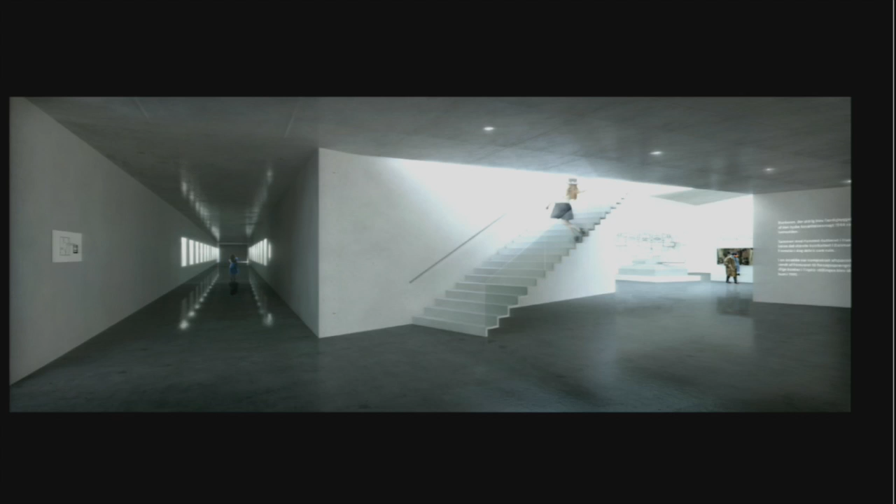We thought it's hard to understand what the bunker is because the cannon was never installed. So we found the production drawings of the bunker, and we proposed to create this glass prism. A stair takes you to the top, where we recreated almost like a wireframe of the old cannon, but instead of actually having it as a cannon, it's a giant binocular.

It's like this: if you just have enough distance between two lenses, you don't need the binoculars in between. So we can actually create a binocular that can look 55 kilometers, which was the range of the cannon, and suddenly, intuitively, you can understand the strategic position of this bunker in the middle of the dunes. It's almost like recreating a ghost of a gun that was never installed.

We got a full sponsorship for the whole museum, but we haven't found anyone who's willing to pay money to recreate an old Nazi cannon. I guess it's a hard sell.

So bringing me back to America - the reason I often get the objection when I'm showing these projects, mostly from Europe, that in America people say, yeah, it only works in like semi-socialist Scandinavia. Welcome to the real world.

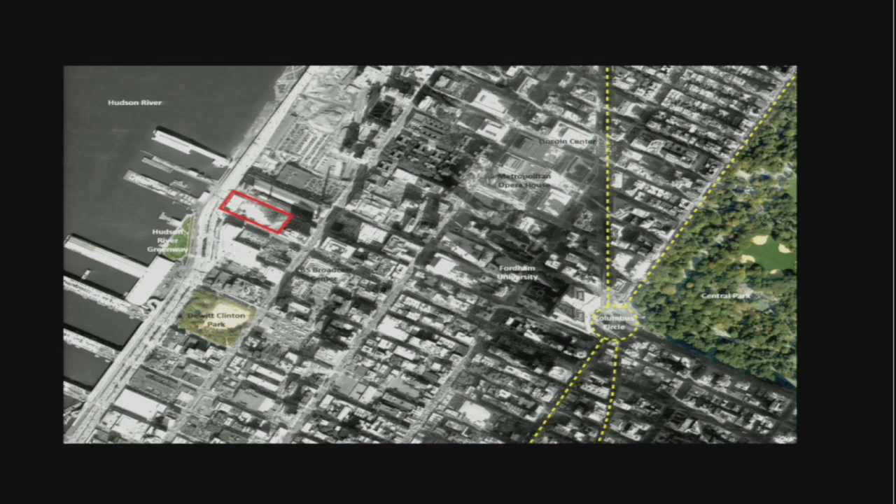But we actually got invited by Douglas Durst to look at this site in Hell's Kitchen. It's sandwiched between the highway, a power plant, and a waste management facility, so we thought they really need an oasis. Essentially this is the courtyard building from Copenhagen where my dad grew up - it's at the architectural scale what Central Park is at the urban scale. So our proposition was to combine the density of the skyscraper with the communal space of the courtyard - essentially, what could a court scraper look like.

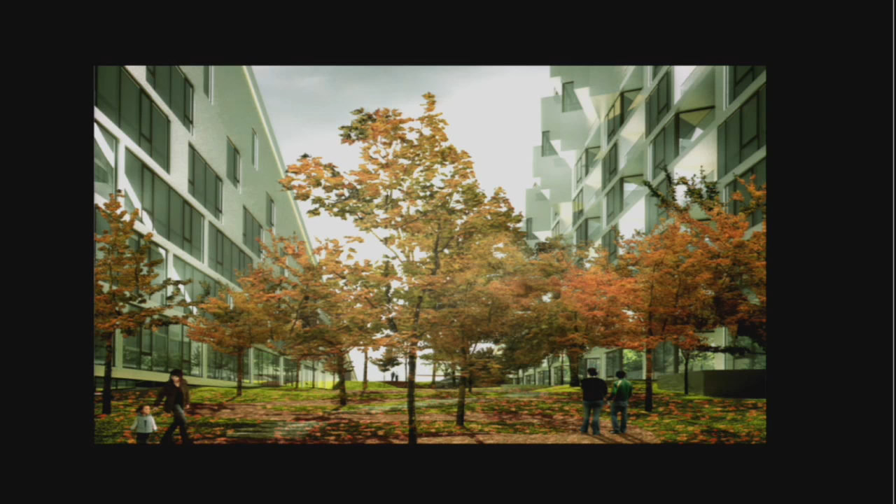We went through the ULURP process and have been building for the last two, two and a half years, so it's actually starting to show quite massively on the skyline. We're gonna top out this Christmas. I think it's gonna be a quite memorable moment on an otherwise relatively straightforward recipe - all of this around here is Donald Trump - and I think it's going to be pretty interesting to see this next to it.

So, of course, arriving in North America, we got to deal with a whole new kind of density. Just one example was that we were invited to look at Vancouver on this site where Granville Bridge touches downtown, tearing the whole site into useless triangles.

Then we started mapping all of the constraints. There were setbacks from the streets, setbacks from the bridges. It was almost a deal breaker - a 100-foot setback from every single bridge, because the city wants to make sure that nobody looks into the traffic. And then there was a park where we couldn't cast shadows. So in the end, we were left with a tiny triangle, 6,000 square feet - too small to build.

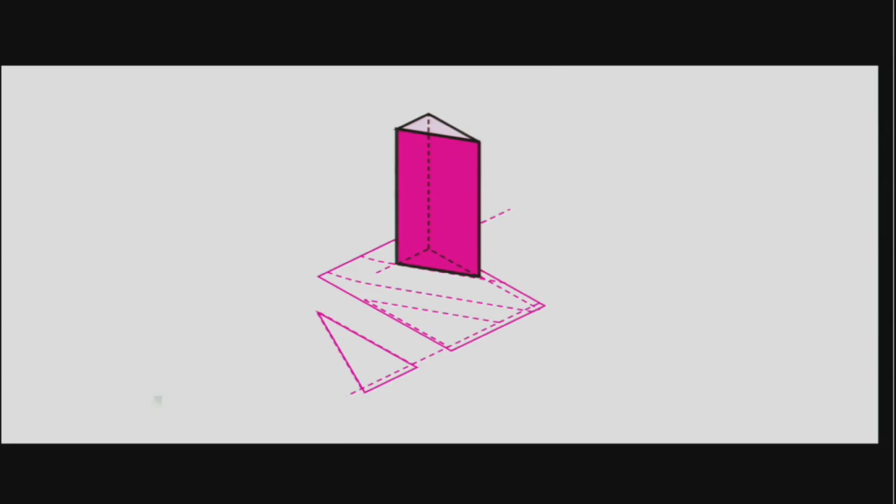But then we thought, we own all of this land. So if it's a question of having a minimum distance, once we get 100 feet up in the air, we can actually come back and make a 12,000 square foot floor plate.

So as a result, when you drive over Granville Bridge, it's almost as if someone is pulling a curtain aside - welcome to Vancouver. It almost looks like a genie coming out of a bottle, expanding in the air. The way it's possible is simply because it's not a shocking cantilever on a single floor, it's a gradual walking column. So on the lowest floor it's like the triangular footprint, and then these slabs gradually move position and finally end up becoming slender columns on the upper floors. So even though it looks both curving and triangular, every single line is actually only 90 degrees.

And so it reminded us of the Flatiron, because the Flatiron is a child of this moment in Manhattan real estate history where the advent of the elevator, steel structure, and real estate value suddenly made a silly site into what is now the namesake of a whole neighborhood. It's just taking it one step further.

But underneath the bridge, you see all these conditions where, for instance, the High Line is the most popular promenade in New York right now. But we have to deal with the underside of the bridge, and because of the weather in Vancouver, it's very wet - to have an urban canopy could actually be a really good thing.

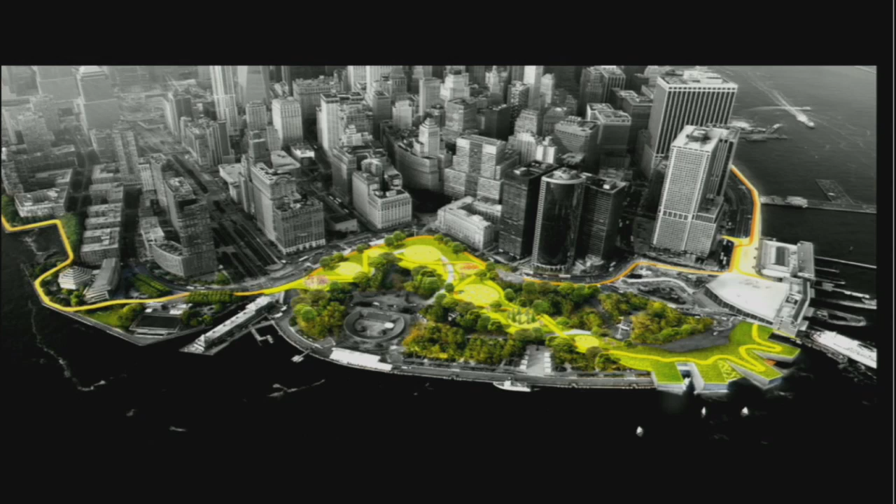Together with the citizens of Copenhagen, it forms an ecosystem of waste that comes back as energy. If you look at trash as a resource, a ton of trash equals 1 2/3 of an oil barrel in energy value. These power plants operate on the economy of scale, so they are huge, ugly boxes that cast shadows on the neighbors and block the views.

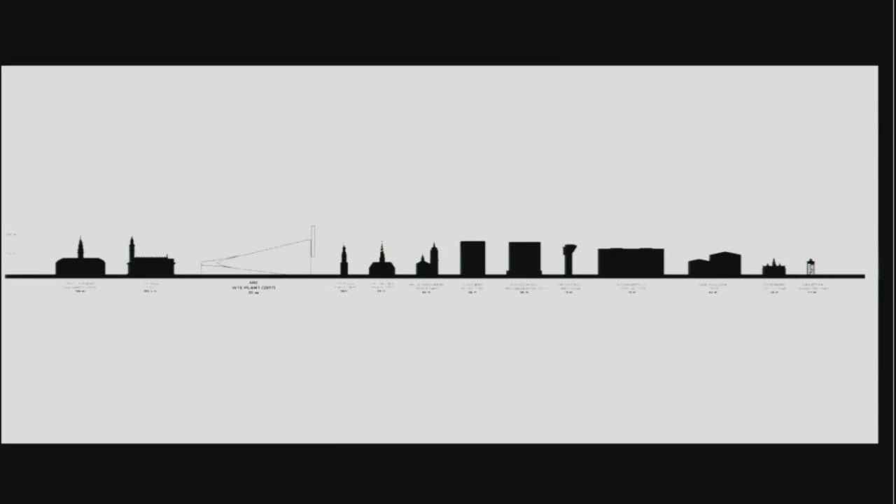This is going to be the tallest and biggest building in all of Copenhagen. It's going to be right next to the marina, and right next to it the local boys go water skiing in Copenhagen Cable Park. So we thought, how can we actually turn this into an amenity, to create some YIMBYism - yes in my neighborhood, or yes in my backyard.

Speaking of skiing, in Denmark we have snow, it's a cold country, but we have absolutely no mountains. But apparently we do have mountains of trash. Copenhageners go 4 hours to Isaberg in Sweden, but because of the sheer magnitude of our building - it's 300 feet tall - we can actually do 2/3 of Isaberg on the roof of our power plant. We know how big the machinery is.

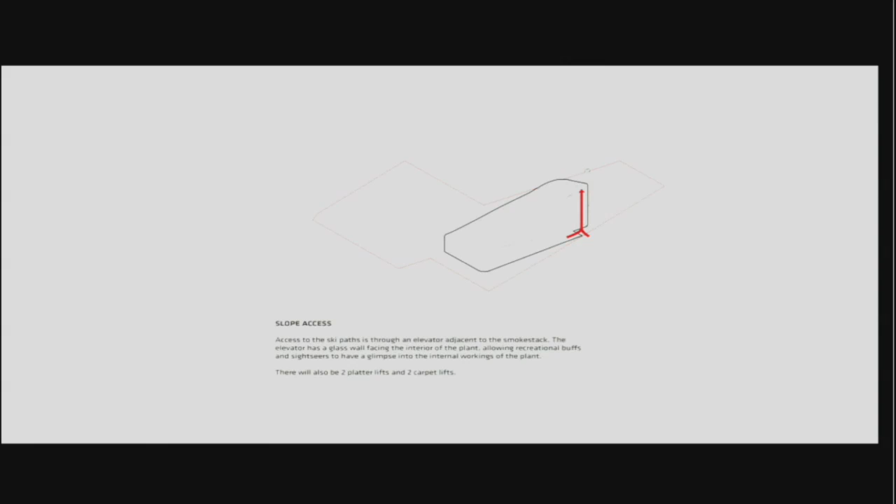So we create this winding ski slope. An elevator takes you to a black, a blue, and a green slope. There's a park with trees - we plant trees on top of the column, so it actually becomes this public park on the roof of the power plant.

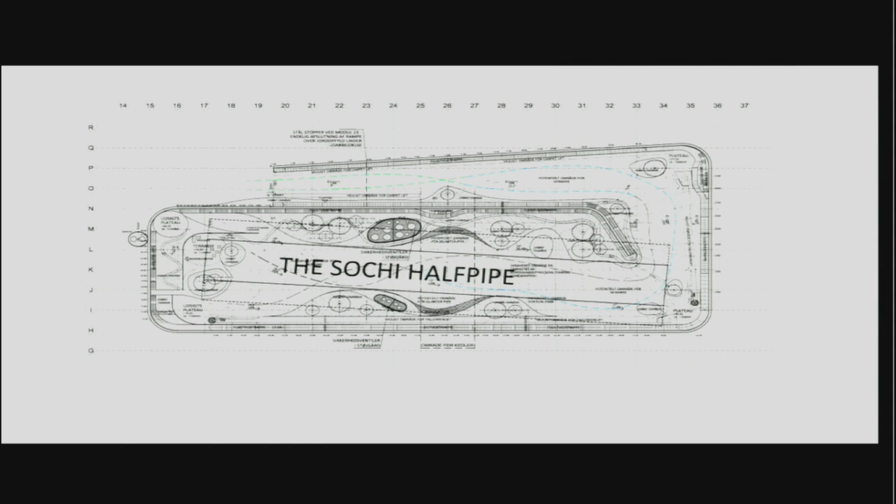Insanely, we won the competition based on this idea, so suddenly we had to figure out how to do it. Just to give you an idea, this is the roof plan of the power plant, and this is an Olympic half pipe - basically the Sochi half pipe and the outline of the power plant. This is like half the length, and the entire roof has this immense proportion. There's also vents and various technical equipment coming out, creating a man-made landscape.

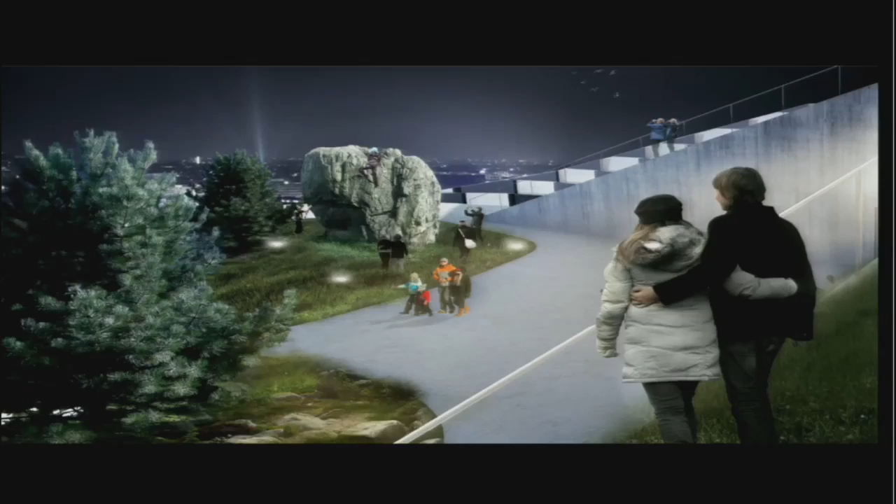So it's not only for the people skiing - actually in Sochi, Denmark got 0 medals, and our hope is that now we can practice at home, we might actually do better in the future. But also for people that don't ski, there's a hiking path through the trees that gives you access to amazing views of the otherwise flat city of Copenhagen.

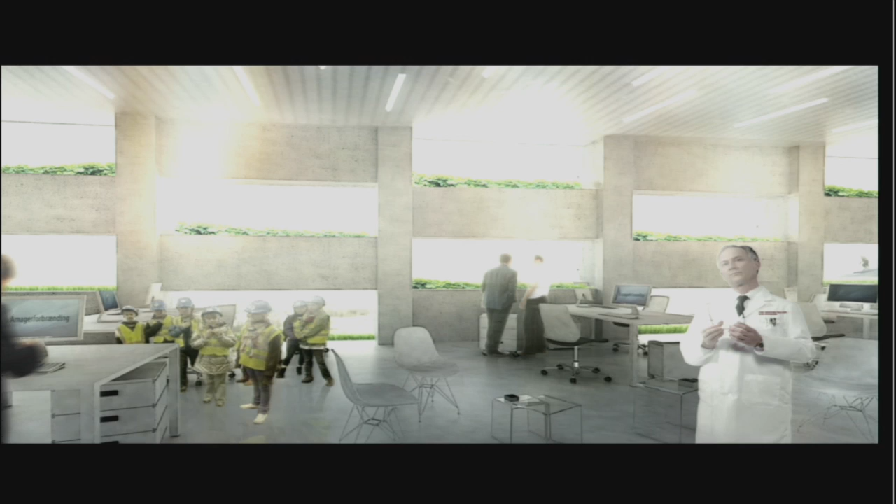The facade has the tallest climbing wall in the world for people with balls of steel, 300 feet. And the facade has these prefabricated aluminum planters that are incredibly light but very stiff because of their geometry, filtering daylight into the plant and the workspaces.

So in a way, you can say this idea of turning cities and buildings into ecosystems is very close to coming to completion here, because locally we harvest the different resources - the rain, the sunlight, the natural ventilation - but also together with the city of Copenhagen, it forms a metabolism of waste and energy that really makes it a single ecosystem.

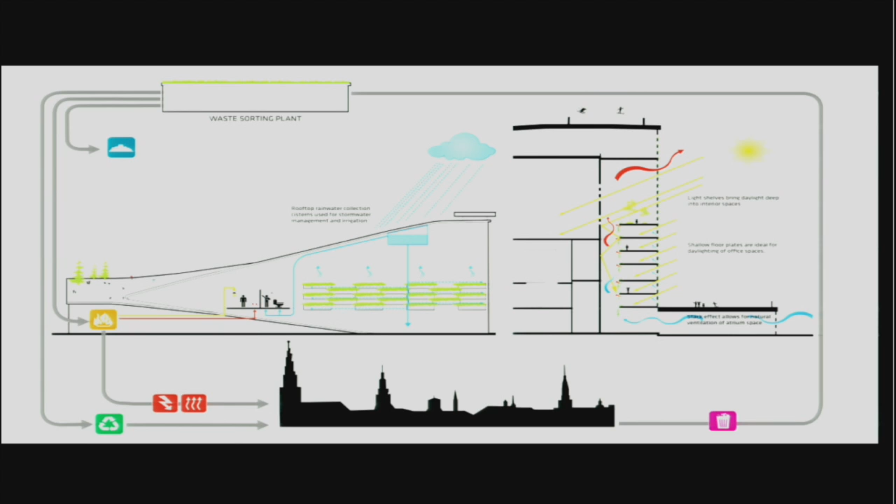It only contains steam and CO2, much less than any other power plant, but still some CO2. So we thought it could be interesting to express this. The reason the CEO of the company liked the idea was because she could see that the ski slope made something invisible visible—normally you'd never go near a power plant because it would be completely poisonous, but here you actually have fresh mountain air right next to it, on top of it.

But we also thought to play with the chimney, to rebrand this idea of a power plant. So we designed the chimney so that it accumulates emissions and puffs it out as a gigantic smoke ring. The idea is that it takes something that used to be poisonous and turns it into something playful—like the ultimate symbol of hedonistic sustainability.

The thinking is that each time you count a smoke ring, it's like announcing that we just emitted 1 ton of CO2. Our original idea was that it should be the smoke that was being puffed out, but the problem is the smoke is so clean you can't see it. We still really liked the idea, so we went through a lot of different tests, and finally found out that if we accumulate the steam in a compression tank, we can release it in bursts that would be visible.